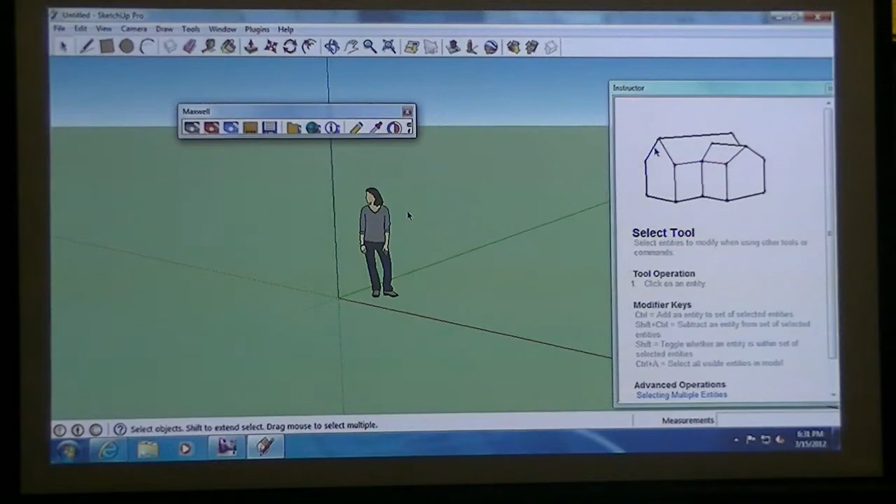We're not going to need SketchUp, right? No, this is the only time I'd ever open up SketchUp, just to show you where it can go.

So we need just the DWG? Yeah, you just need the DWG file, and you're going to need this JPEG file.

She's like the crazy aunt you don't want to invite to your wedding. Everyone wants to get their wedding. I'm a ball of fun.

Map 12B JPEG and Lower Manhattan DWG.

And then if you got your Revit open, go ahead and just start a new project. We're going to be starting part 2 of the semester, so no more bridges, and we'll get into some buildings.

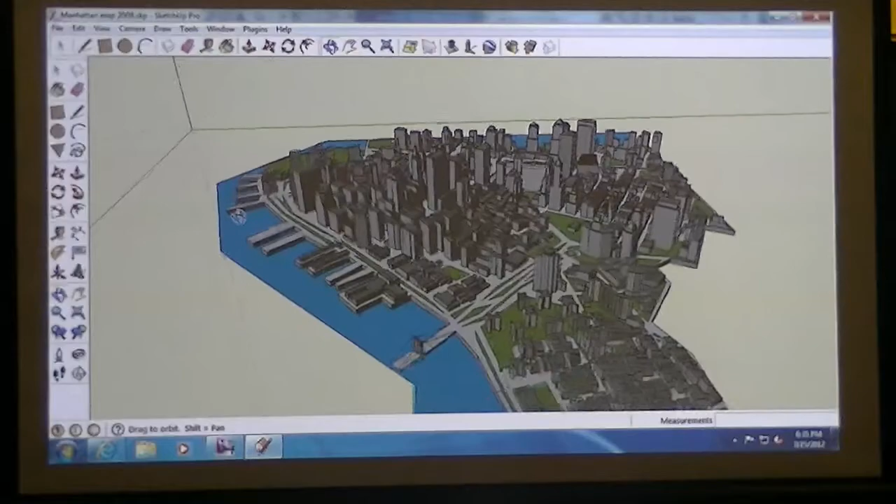Today we're going to start with this: I went to the Google Warehouse, and there's a Lower Manhattan SketchUp model that somebody provided there, actually from 2008. We're going to use this as our base model for the next part of the project. If you zoom around in the SketchUp model, you'll see a little building, maybe a church, with a sloped roof. I actually demolished that, and we're going to take over this site. I drew a couple of lines here, and this is going to be our site for the hotel we'll be designing.

So all you need to know is that in order to bring this into Revit, which we'll be doing here in a little while, I exported it. You can bring a SketchUp model directly into Revit, but DWGs always work better, whether it's a 3D model or even a 2D drawing. So I exported this SketchUp file as a 3D model and then as a DWG file.

The other thing to note is that if I click on some of the different materials shown on the SketchUp model and look at the RGB value of each one, the grass is 98, 140, 74, and the water is 0, 191, 255. Just keep those numbers in mind.

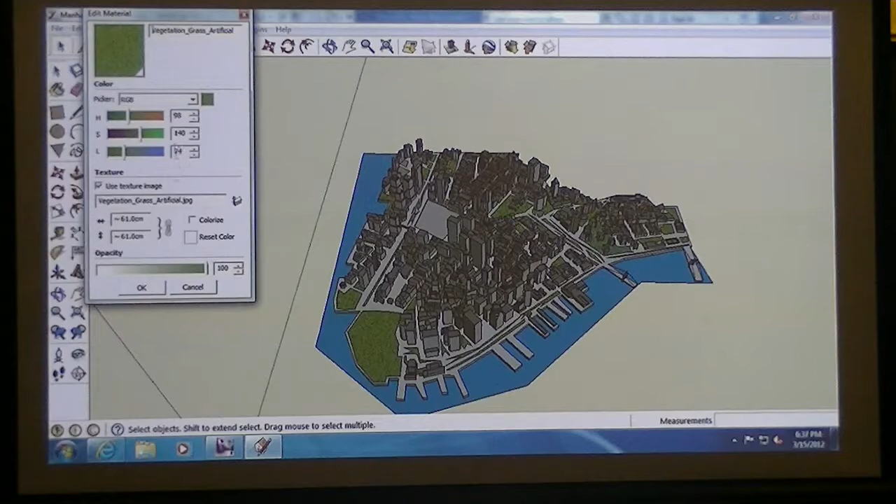When we bring a DWG file into Revit, essentially none of the materials come through. What actually happens is Revit will add materials into the project environment, but it names them based on the RGB values. So in your project folder or materials dialog box, you might see six different materials loaded in, all called something like 'render material, RGB' followed by that value. You'll see a whole series of those. So when I talk about that later in the class, that's where those numbers came from.

I'm going to close out SketchUp now, because that's about all you need out of this program.

If we have a blank project open, what we want to do first is establish bringing in this DWG file into the Revit environment, so that we can begin to do some massing, solar studies, and also some floor area studies.

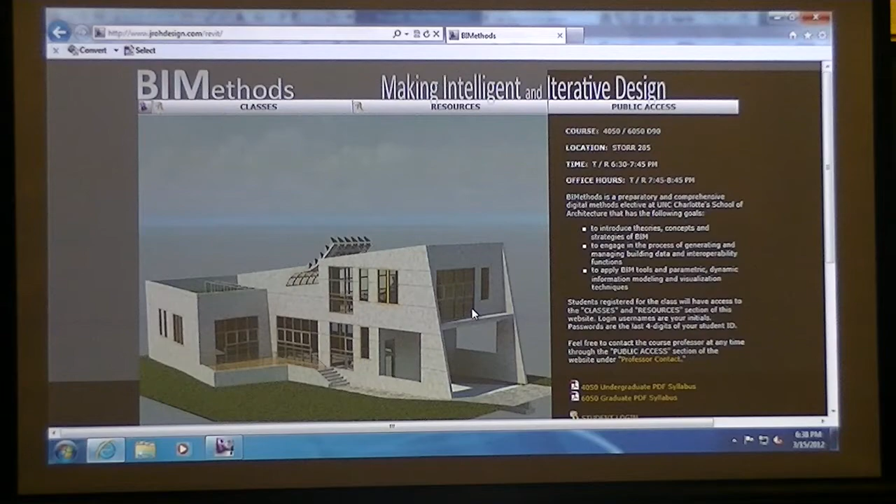One thing you'll probably want to do is refresh yourselves later with the syllabus, on the part that talks about part 2. There's a project narrative in there with our program for the actual hotel we're designing, including areas in square footage for the entire area and what all the different parts will be for the hotel. So download that PDF again and look at it when you get a chance.

The first thing we're going to do is go into a site plan. Under insert, let's go ahead and import a CAD file. Now, I'm not linking it, I'm going to be importing it. The reason I'm importing versus linking is that when I import a CAD file, it brings along some of the line styles and might bring along some of those render materials I was just talking about.

If I link it, most of the information stays in the background as part of the external reference. You would normally link if you plan on going back to that original DWG file and modeling more things with the site, and want it to eventually update in your Revit file—that's why you'd link, because you can always update by reloading it. If you import, it's a one-off: it comes in and you're placing it into the model, and if you ever want to update it, you have to delete it and import it again, going through all the setup steps.

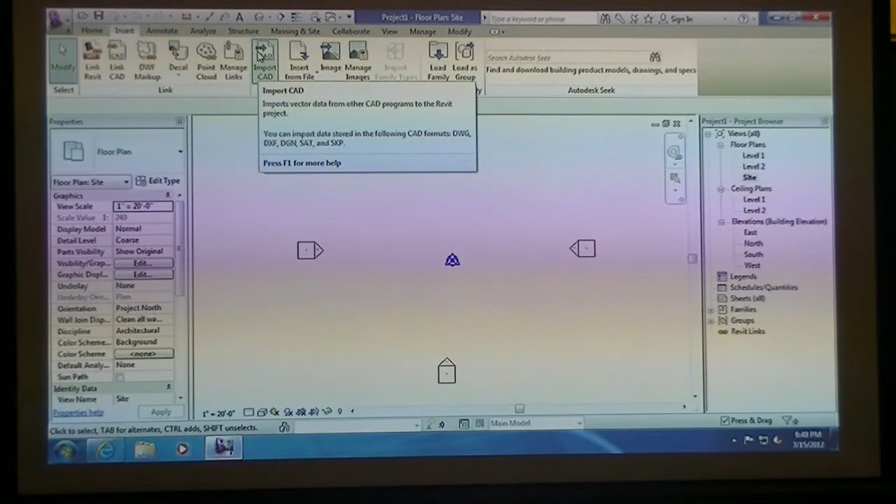If you link it, you have to keep that CAD file with you. Just like in AutoCAD, if you're familiar with XRefs, if you move your Revit file and take it with you on a USB stick, you don't always have to have that link with you, because Revit will say it can't find the link and it'll use the last known reference of it in the model. But if you ever want to reload it or do something else with it, you'd have to bring that file with you. You can't reload the link if you didn't have it.

So let's go ahead and hit import, and we're going to browse to wherever you downloaded your Lower Manhattan DWG file.

When we import anything that's a DWG, it's always recommended, and in general I always like to do auto, origin to origin, as a positioning. That's so if I ever export this and want to bring it into Rhino or another program, and I bring it in origin to origin, no matter where I'm working, I can always bring it back together. As soon as you do anything else other than origin to origin, you're manually placing it, and every time you want to bring it into another file, you're having to manually place exactly where the insertion point is, and you can start to really get confused after a while.

So origin to origin is always best. Colors, I always like to preserve whatever they were. And we'll place this at level 1, and that'll be fine, and everything else is good. We can go ahead and hit open.

Should only take a little bit here. You'll see the Lower Manhattan model is shown up in the top right. We're looking at it because we're in a plan view, so we see it from the top. And because we started a new project, remember, in our project browser, we don't have a 3D view, so we need to click on View, and then 3D View, Default 3D.

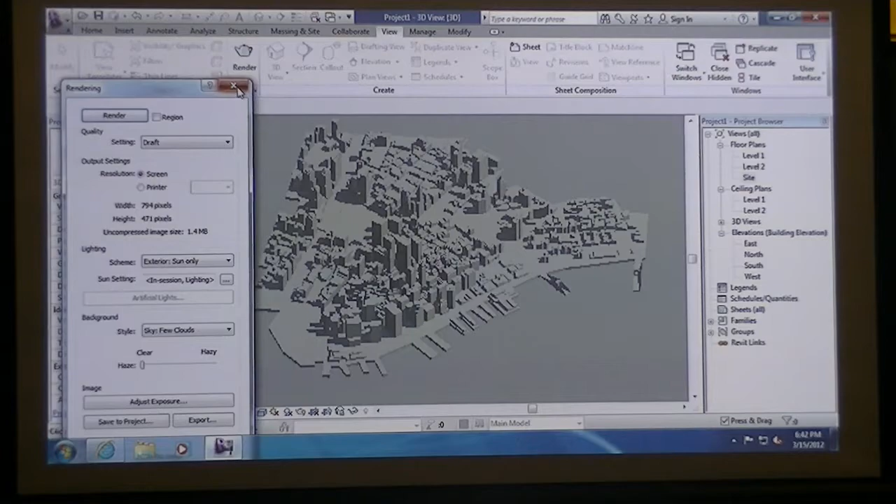And that might be okay, because we want to have a white model as part of our context so that we can do our own model with whatever materials we want. But you also might want at least some of the basics, like where the grass is located and where the roads are, so that you can delineate where the block is and so on. So in order to actually make those materials render eventually...

One thing you can do is go under Manage, and under Object Styles, then Imported Objects, you will see that under Lower Manhattan DWG there are 2 layers, and also a 0 layer, a site layer, and then there are these 2 render materials off to the right. We're not going to worry about those right now, but look at what is calling those render materials: Render Material, and then some random RGB value of blue, and the same thing with green.

If we look—I canceled out of that—and under Manage again, if you click on Materials, and since last class we went over the material dialog box, if you scroll down, notice under Render Material we have 1, 2, 3, 4, 5, 6, 7, 8, 9 different render materials. And here's one called Render Material 98-140-74. Remember I threw that number out there? That happened to be the render material of grass.

And you see that it turned green, and it's under shading. Well, that's why when we turned it on shaded view, we could actually see the grass, we could see the road and all of that. But look at the image up at the top—that's still a default gray image.

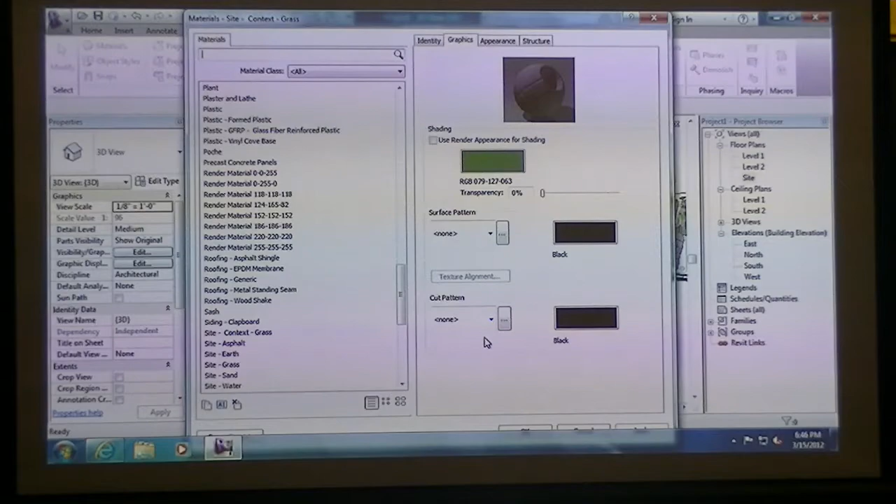But in order to change this, what we want to do now is click on Appearance. And if we scroll down under our Appearance Property Sets, there's a tab here called Site Work, and we could scroll down until we find a grass that we like. Maybe dark rye might be good. Other ones look a little fluorescent to me.

Let's see what that looks like. That's kind of bright. I'm going with dark rye here. Okay.

So by doing that, now when I go ahead and click on my view and render, do a quick draft rendering, I should get this kind of grass texture. And it looks a little out of scale right now, and I'm going to tell you why in a little bit, but we'll go ahead and keep it that way. We know that that works.

And another one that we might want to do is the buildings. We want to make those white. We'll keep the road gray however it is right now. So again, I'll go under Manage, let's click on Materials. I guess I should have kept my SketchUp model open.

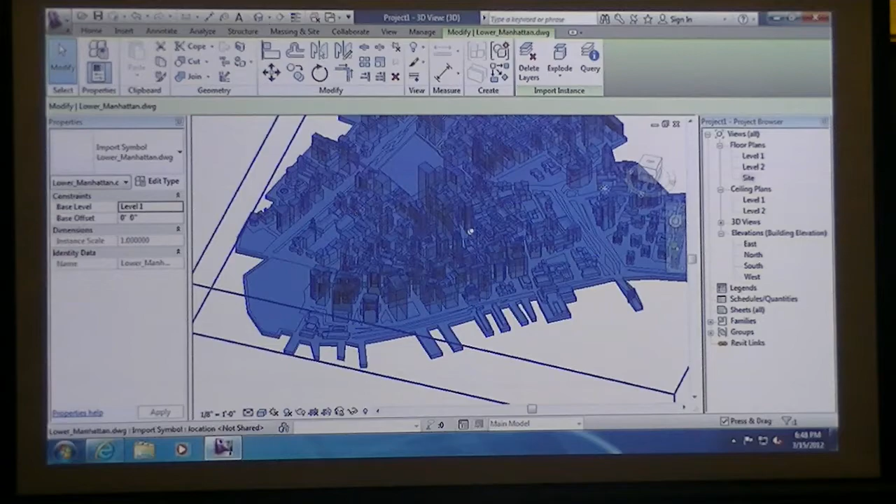Oh, I guess we can, let's do one other thing here. Where's query? If you click on this model and then click under a query, the top right. Let's see if this works on. You should be able to click on, looks like I can click on these different parts.

So I'm hovering over the buildings, and if I left click, it tells me nothing. It tells me it's a curve, it's not a block, and it's on layer 0, so that didn't really help me. I was hoping it'd give me some information about the color.

Alright, so let's just guess a little bit real quick. So it's one of these render materials, maybe this darker one, the 118. If I change it to red, so it wasn't that one.

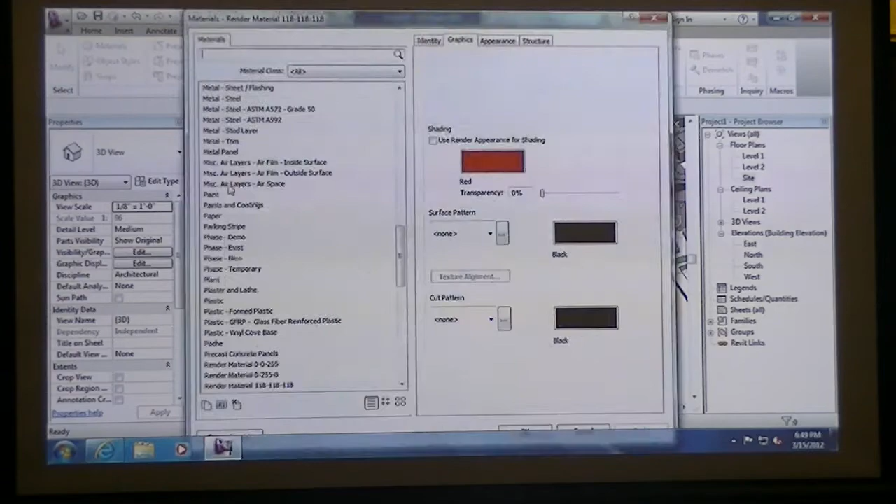Let's see if you guys can find which one it is. There you go. It is render material 152. That's the color of the buildings. So I'm going to rename that and also call this site context.

Does everyone have the same numbers, by the way? RGB values? Okay, because I have different ones on another computer. I don't know why. Site context and then buildings.

I'll change this back to the 152 that it used to be, now that I found it. And then under appearance, let's just go ahead and make that a default. I guess we could use a ceramic or a generic, and then give it, let's do generic and then make it 255, make it all white.

You guys see how I did that? Kind of a quick recap of what I did last class. Anyone need me to repeat that? Okay, so did everyone at least get to the material dialog box?

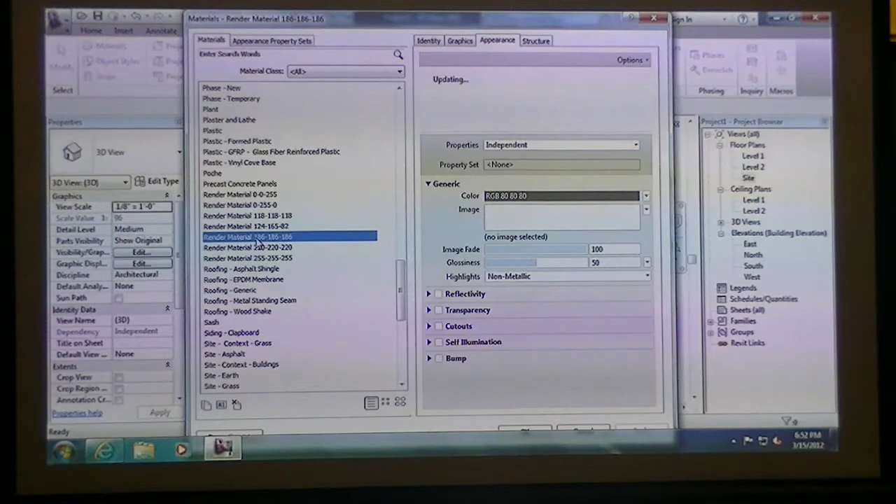Did I do the wrong one? Yeah, I was having a problem getting my buildings to turn red, and after changing it to white, mine didn't update either. Part of the site turned white though when I rendered it. All right, let's see if it was this one. Maybe I was on the wrong one.

So I did the wrong material apparently. It doesn't quite update as nicely as you would like. So I am just going to... site context buildings, I'm just going to delete that.

Would it delete whatever that was there? Probably. We'll figure it out. Let me change my render material to 118. That's what it was, site context buildings. Default.

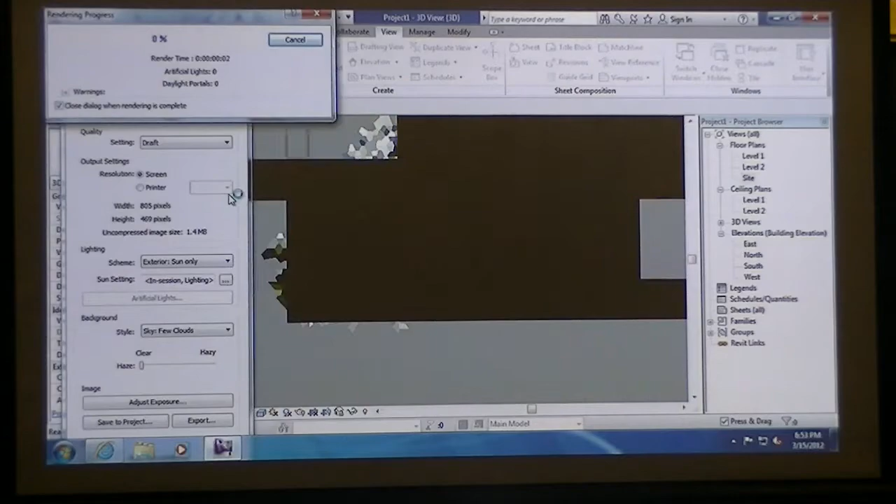Alright, so that worked. There's the 118, 118, 118. And whatever the roads were, that still stayed the default gray color, so that's fine. Alright, that's all we need to do on that part. Let's go ahead and hit save.

As we'll start calling this hotel something. You guys can't get your colors to change. It's not too drastically important at the moment. We can always go back and update those later.

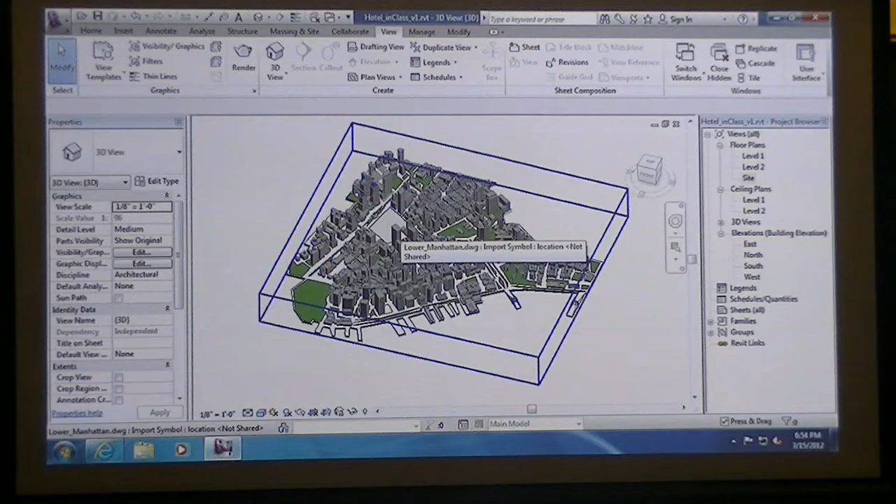So the next part is, if we are looking at this, go ahead and click on an elevation view. Let's say north, for instance. Remember our levels, our floor levels, our datums. Notice that we place this on level 1.

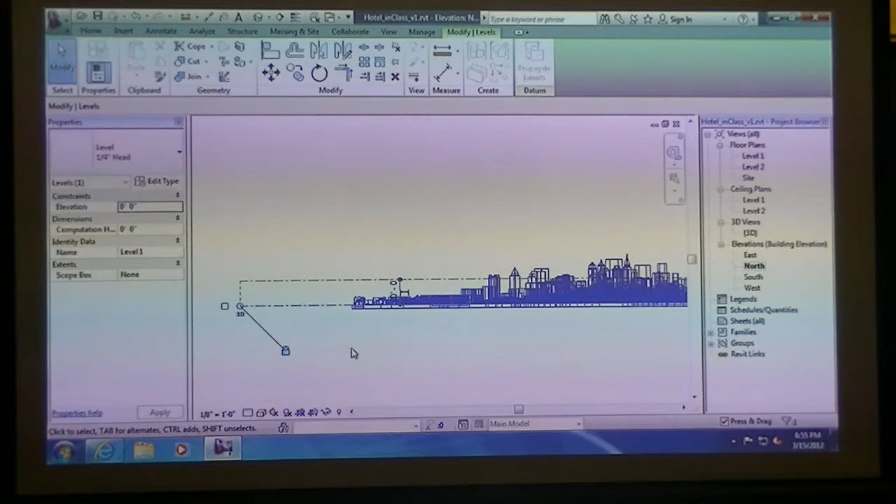And I can drag on these datums. I'm going to drag that 3D point all the way through this. But kind of look at the scale of this. Whoever modeled this in SketchUp, not sure what scale they're using, but there's no way that these buildings are 10 feet tall. But that's exactly the scale that this model came in at.

So because I want to use this, this is kind of similar to what you might do with scaling DWG plan files or even image files. We're going to get this scaled up correctly based on a set of information that we have. And that information is from the New York City zoning website.

I downloaded a couple different maps, and that's what you downloaded, that DWG file, or JPEG file, that was called map 12B. And when I look at map 12B, I can see that this is pretty much the lower Manhattan part of the zoning. And you also see kind of where our site is located, which is about right here, if I can zoom in.

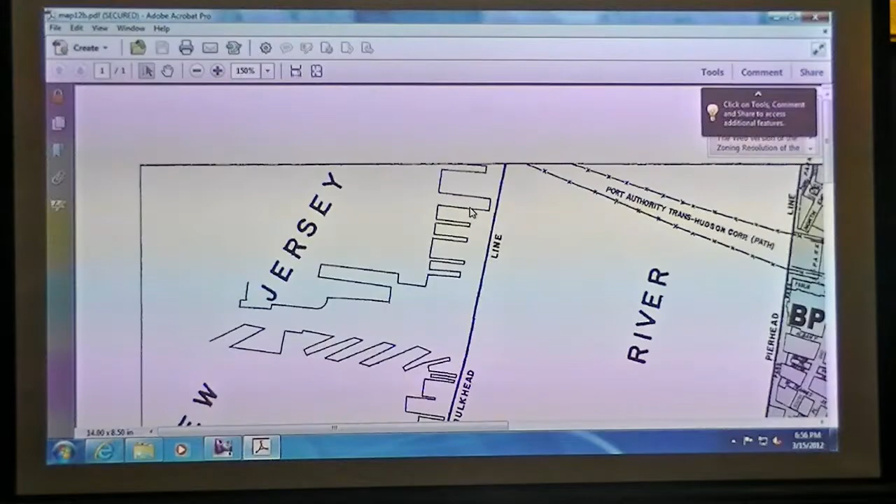Well, these maps aren't 100% as accurate, or the model's not as accurate either, but we're somewhere in this location right here. So the zoning for this particular space is in a C6-9 zoning. We'll get into that next class, but just remember that.

Also, when we look at this map, one thing that we can notice is that down in the lower left-hand corner, there's a scale. So by looking at this map, we can have some reference to exactly how many feet a particular inch is. It looks like it's 600 feet to an inch.

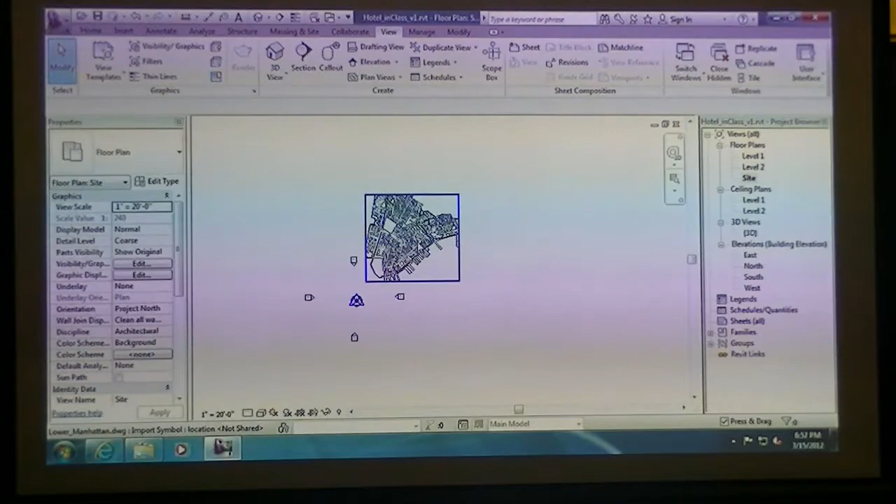In Revit, in order for me to scale this correctly, or as correctly as we can get it for the purpose of what we're going to be using it for, let's go ahead and insert an image file. Inserting an image file is like inserting a background that we can use as a reference. And the image files that we can import are shown below.

It says bitmap, JPEG, PNG, or TIFF file. Now originally I got this map file as a PDF from the website. So in order for it to be able to come into Revit, all I did was go into File, Save As an image file, and then picked JPEG, TIFF, or PNG off of this PDF, and then you get the same thing as an image file.

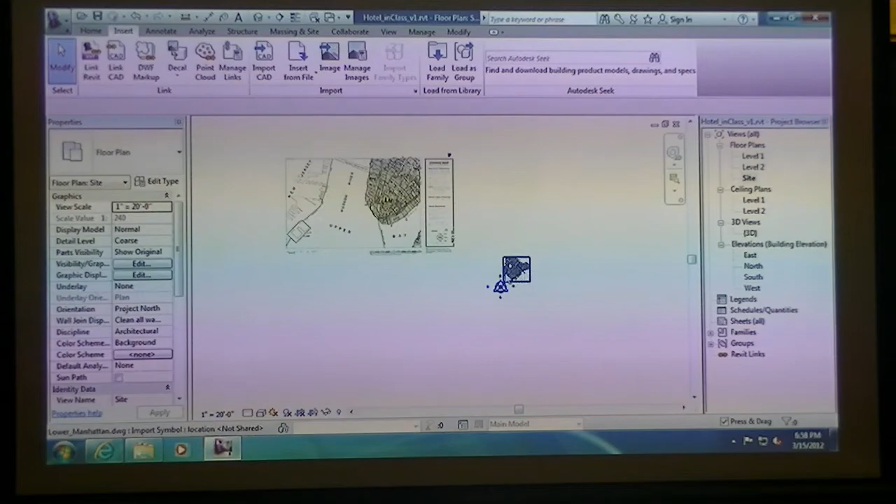So now we can go ahead and select our map 12B, and then we'll also just kind of drop it somewhere on the screen, it doesn't really matter where at the moment. So you should have an image that's placed in here, and it's definitely a lot bigger than that actual model that we just downloaded from the Google warehouse.

If I zoom in on the scale on that map, let's go ahead and click on Annotate, Detail Line, and then under the line styles, also go ahead and choose lines instead. Right now the default is thin lines, I'm going to choose lines. The reason I'm choosing lines is this line type comes up as green on the screen instead of being a black line.

Annotate, Detail Line. When you select that, you should have a drop down under line style on the far right, and then you can pick lines.

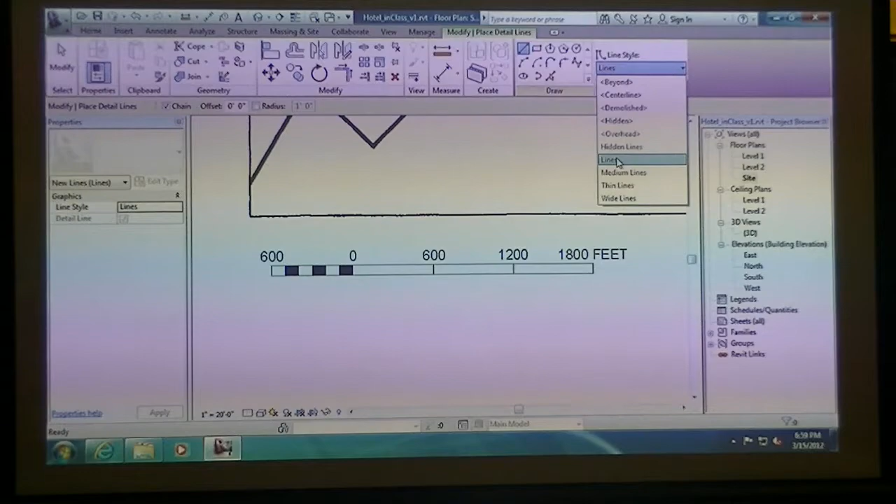Now I'm going to get as close as possible as I can to the 0, hover my cursor over this, and I'm going to start drawing to the right, and I'm going to type in 600 feet.

So you can see that even this image, when it came in, obviously isn't drawn to scale, it wasn't a full-scale drawing of lower Manhattan. And so this green line right now is representing 600 feet.

If I zoom back in on the scale, I can draw another line. I'll kind of draw it below this other green line that I just did. And I will draw a line and get it as close as possible to this other 600 feet.

You may have to zoom in. You don't have to be exact, but just close enough. So my line is like 41 foot 6 inches.

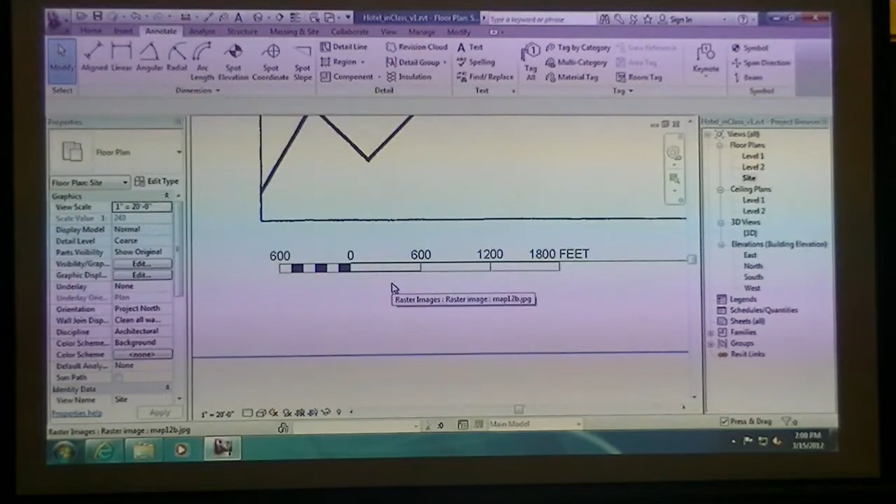Everyone got those two lines? So basically what it's saying is this image right now, 41 foot 6 inches of it is equal to this 600 feet.

If I click on this image, actually zoom in, and now that you have those two lines, I'm going to take this shorter line and move it, snapping to the end point, and move it up to overlap exactly on top of the larger line that we drew. So you should have two overlapping lines that you can tab over and kind of cycle through, so that they're on top of each other.

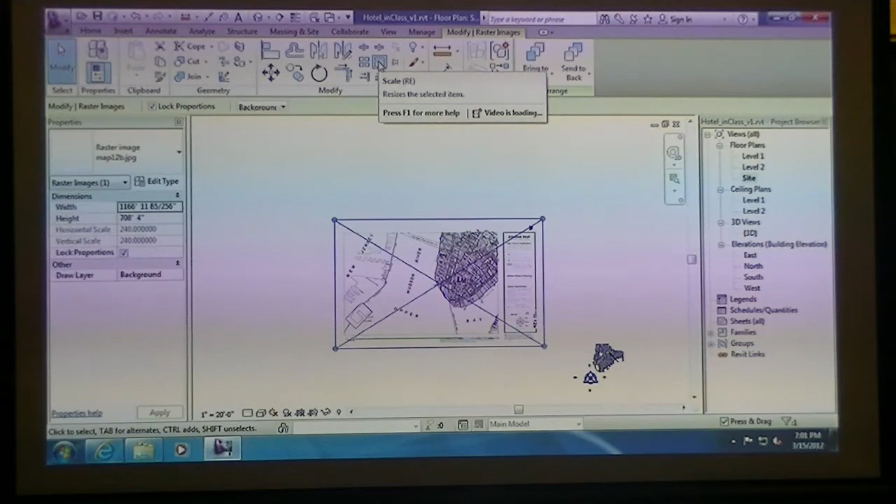Next, I'm going to select the image, and so now in order to scale this image to be true scale, actual scale, once we select the image, our modify tools pop up, and under modify, there's a tool called scale, right there.

Let's go ahead and click on scale, and we'll keep it graphical. We could do a numeric scale, which would mean I'd have to actually pull out a calculator and type in 600 feet divided by 41.5 feet, and I'd get some kind of scale factor that I could type in numerically. Or I could just keep it graphical.

And then my first point that it's telling me to click on, it says click to enter origin. I'm going to click this endpoint.

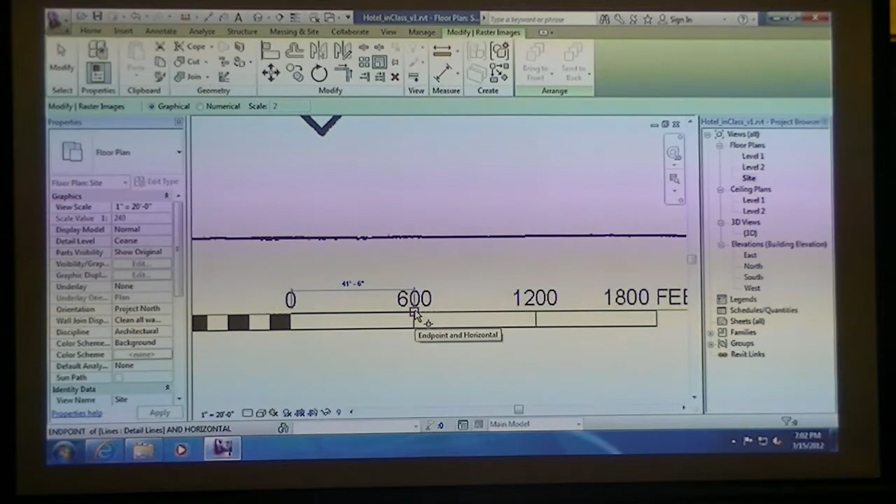Then it wants me to enter a drag point. That will be that short end of the line that's at 41 foot 6 inches. So I'm going to keep moving my cursor until the endpoint shows. I'll click there.

And then it wants me to pick another line as the end reference, and that will be the end of that line. So now what I did is I basically have something that I could actually draw a line on top of this image, and I could physically know that I am drawing something to scale that's in a real scale.

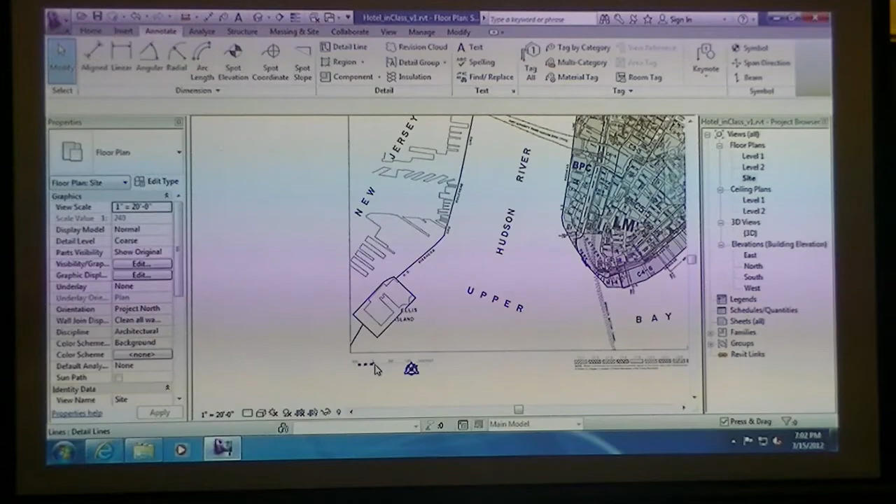When you're done, you can just delete those two lines. One will be really, really small now, because it was at 41 foot 6 inches. Go ahead and just delete those.

So now, if you look at what Manhattan looks like in the image, and then I try to zoom in on my model, look how small the actual SketchUp model was in comparison. So we definitely know there was some kind of scale issue going on when that was actually modeled, or maybe when we brought it in, we did something to scale it, but that's a possibility as well from moving from one software application to another.

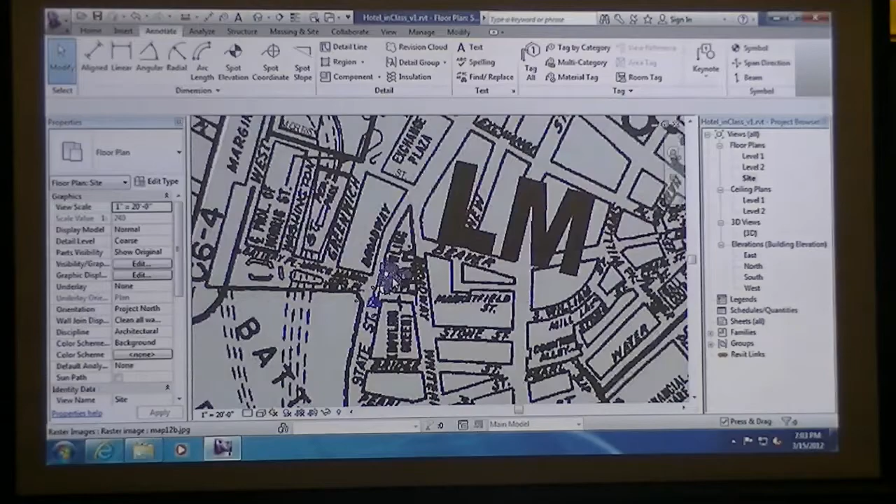Everyone get your image scaled up? So...

The next thing I want to do is I'm going to zoom in on this model. And it might be kind of hard to see. Maybe we can turn on a shaded view.

And when you zoom in on that lower right-hand corner of Manhattan, you'll see all the buildings are kind of gray or whatever color we ended up eventually coloring them. But you'll see these kind of black lines that outline a space.

This is where I demolished that little, whatever that building was, and I'm taking over the rest of this site. And so I drew some lines in the SketchUp model that you guys imported. I exported to DWG and then imported it into here, but before I did that, I drew in SketchUp just a couple lines that will reference our boundary of our site.

Next thing I'm going to do is zoom out. And this part right here where it says Financial Square, I believe that to be this location on our site. For the sake of what we're doing, it looks correct to me. There's 1, 2, 3 buildings or 3 zoning spots, and then there's all these little buildings off to the right.

If I zoom out, I've got kind of the same situation. Maybe the blobs aren't all exactly the same, but it does look like the length of this street here should be something that we can measure.

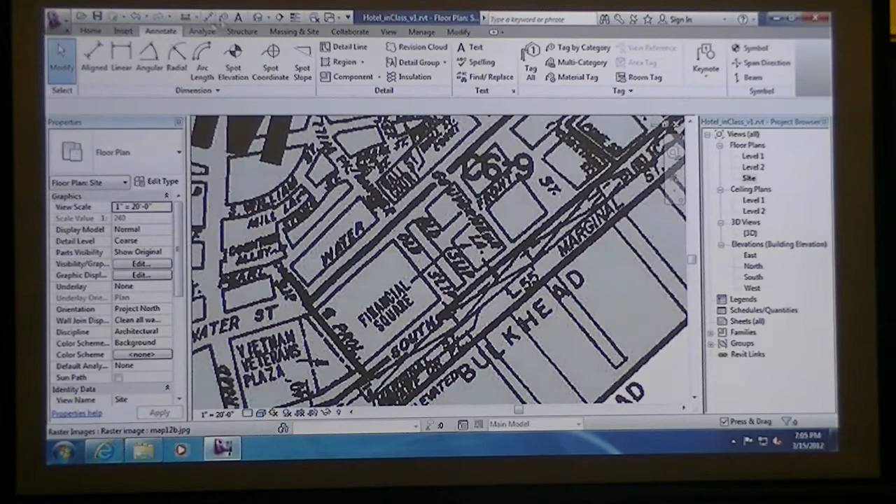So now, in order to scale our DWG file, I'm going to click on the detail lines again under Annotate, and I'm going to trace as best as I can the start and end point. Again, we're not going to be exact, but I've got a dimension of 312 feet. So you could also just type in 312 feet.

So I know that that length, according to all the information we have at the moment, is supposed to be 312 feet. And if I go find the same location on my model, and if I were to use the measurement tool, up here in the quick access toolbar, which is at the top, it's this toolbar that never changes, there's the ruler command, so you can measure, and I can just click on 2 points.

And I may have to tab to get that other endpoint because of the angle we're at. So we can go ahead and tab on that, and you can see that our true length there is like 7 foot 3 1/8 inches. So obviously we're way off on this scale.

So what I want to do is draw another line, but this time I'm going to pick lines. Let's see if I can do this. Okay, so sometimes when you have a CAD background, actually all the times when you have a CAD background, and you're on Annotate or in any kind of mode where you have these draw commands, you have this one command here called pick lines.

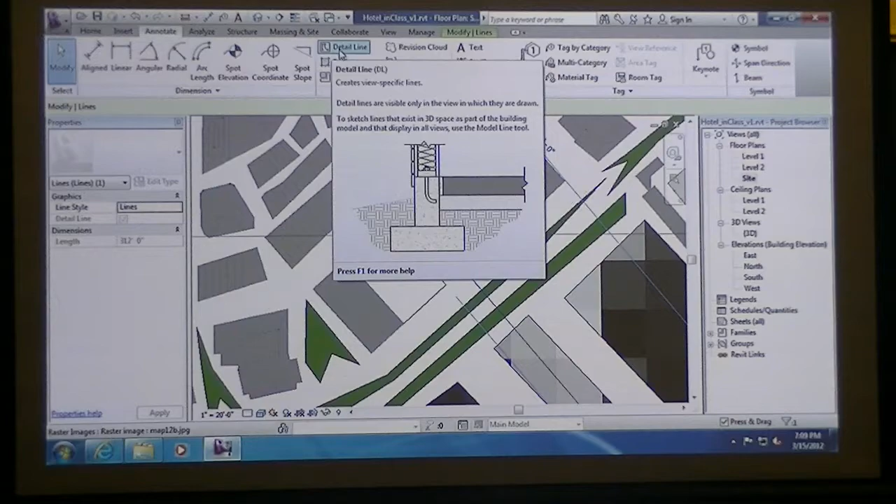You can also draw that line by, if you start drawing it, you'll notice that you do get dimensions that start showing up. So you could just kind of drag this out until you get to 312. So that is a method. So you have to keep going.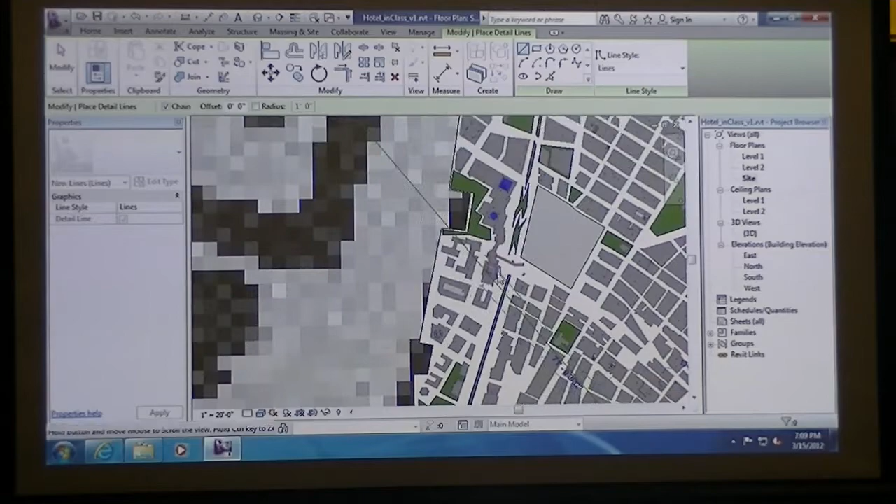So take this line that's 312 feet, select it, and let's go ahead and move the endpoint. I'm going to temporarily hide this image file in the background so you guys can see what I'm doing.

Take this line that's 312 feet, click on move. I'm going to select the endpoint down here in the lower right, and I want to match it up to the endpoint of our site. Again, kind of the same theory that we just did with the image. We're overlapping our two lines.

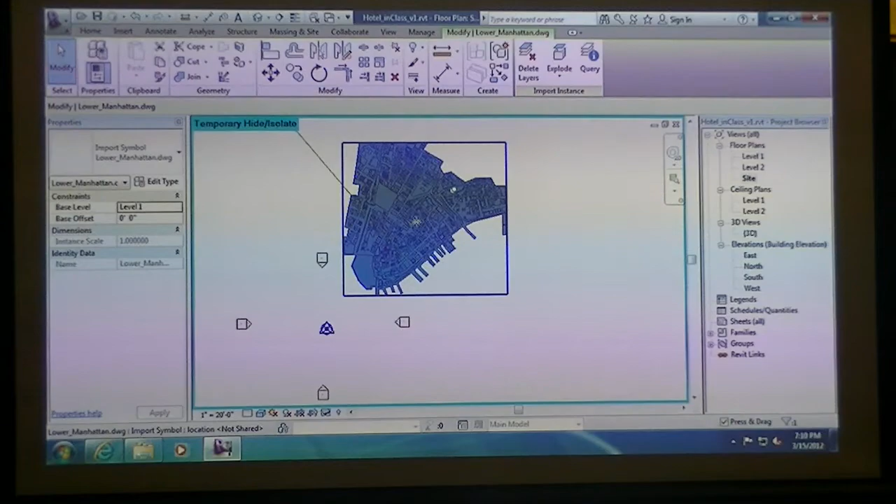Then we can do the exact same thing. We can select this AutoCAD file, and you'll notice there is a pin, this little push pin icon that shows up. That prevents us from changing the element position. So we need to click that to unpin it. You can also unpin it by the icons up here, and you can also repin it by the same icon. You want to unpin this, and then we're going to do our same steps.

We're going to hit Scale, Graphical, and again we'll select the endpoint and this other shorter endpoint. Then let's go ahead and scale and select our endpoint of our 312 feet.

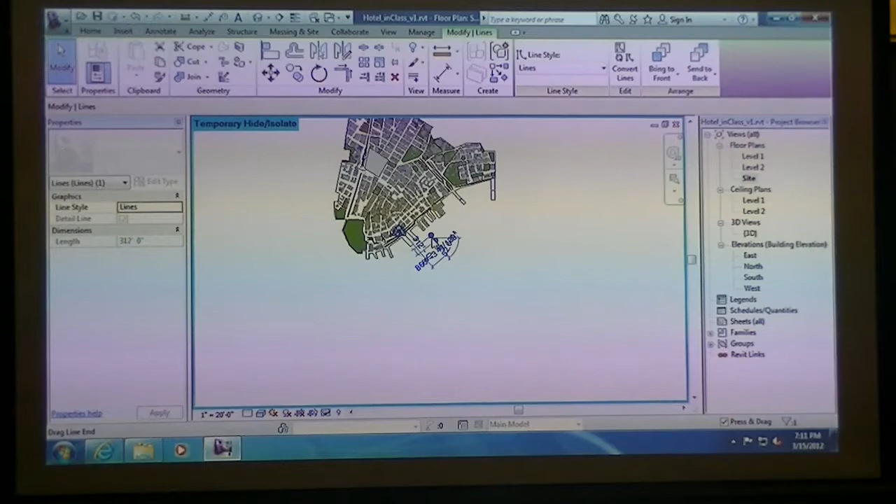When we're done, we can delete those annotation lines. You can kind of start to see that the annotation lines, even though they're for drafting and doing things later when we get into detailing, I use them a lot just for construction lines, helping us maneuver around in Revit, and just use them as basic temporary lines that we can eventually delete.

Now when we look at a north elevation, you should see that that looks a lot more realistic, that our 10-foot floor line looks about correct. That's probably about a story, and all these other buildings are probably scaled correctly as well.

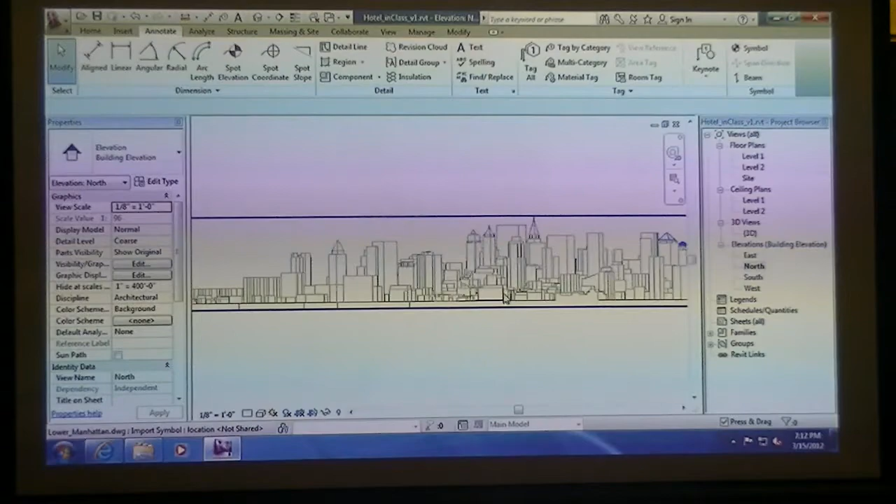Go ahead and look at our 3D view. And now this time when we hit the render button, view, render, I'll just do a quick draft render.

No, my grass didn't change. I was thinking my grass would have scaled correctly. So we'll have to worry about that later. I might actually just go into my grass material eventually and just turn it a default green color, so that when we actually render, we're rendering all of our materials associated with our building.

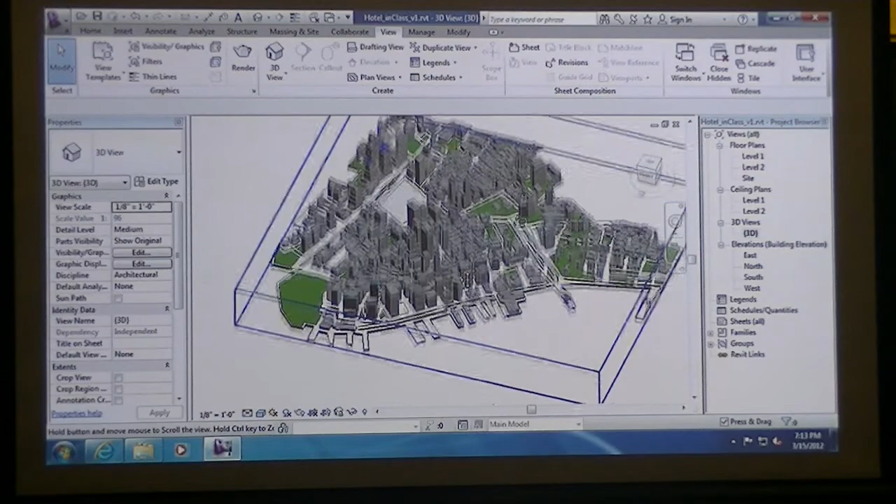Would it have scaled with it? Like if we would have applied it after the scale, would it? Maybe. Let me look at my site context grass appearance. Come on. Oh, it's going.

So, well, it does have a scale, sample size, so I probably can play with this scale eventually to scale it down. But the detail level we're going to be at when you're trying to render a skyscraper or whatever project, you're probably not going to really notice the little grains of grass. So it'll probably be better if we eventually just make that a solid color. We'll do that later on.

I'll probably just hit remove image here, and change my color. What was that again? 79. What did you have before? I'll just pick a green right here.

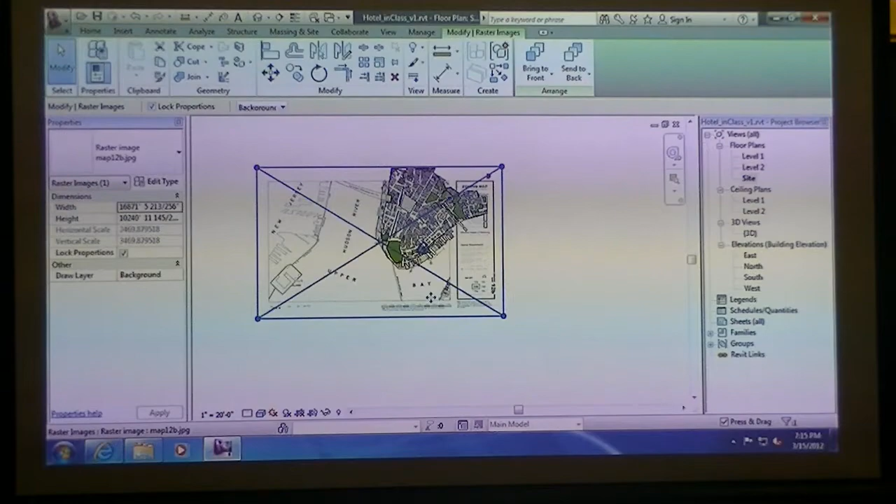So I'm going to go back into my site plan. Remember I temporarily hid that image, and I'm going to unhide it. Then if I maneuver this around, it actually looks like I got this pretty close. If I turn on my wireframe view, I can see through the model.

It's kind of confusing, but part of this zoning map where it says C4-6 is actually some of the piers out in the water. So anyway, you can see we're relatively scaled close. I'm not going to worry about being exact at the moment because this will give us a file we can now work with that has some realism to it.

Obviously, if we were working in an office, we'd probably hope to obtain a really nice survey of our plot of land from a civil engineer that would be to scale from AutoCAD, and we would be working off of that. So I'm going to delete that image because we really don't need that anymore.

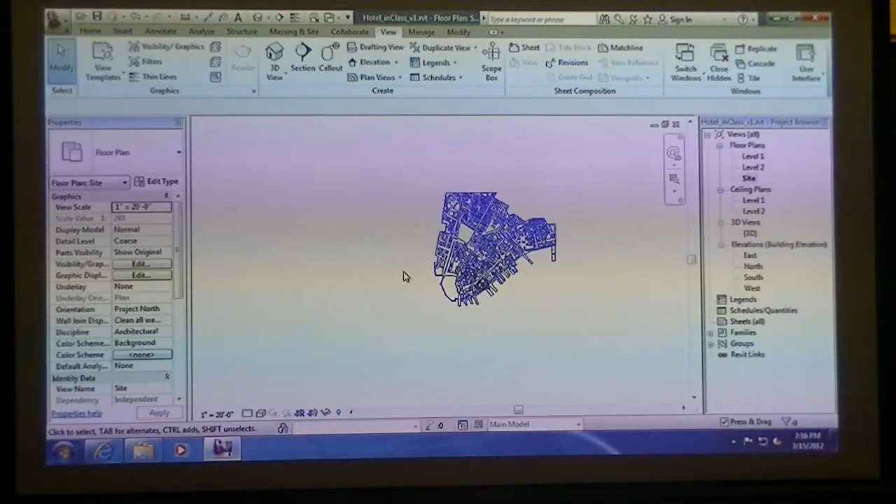The next item I'm going to do is take this 3D DWG file. Remember we're in our site plan, and this blue dot is our origin point. I'm going to make the origin of our site this lower, kind of the south quadrant, and move that and tab over until I snap to that point.

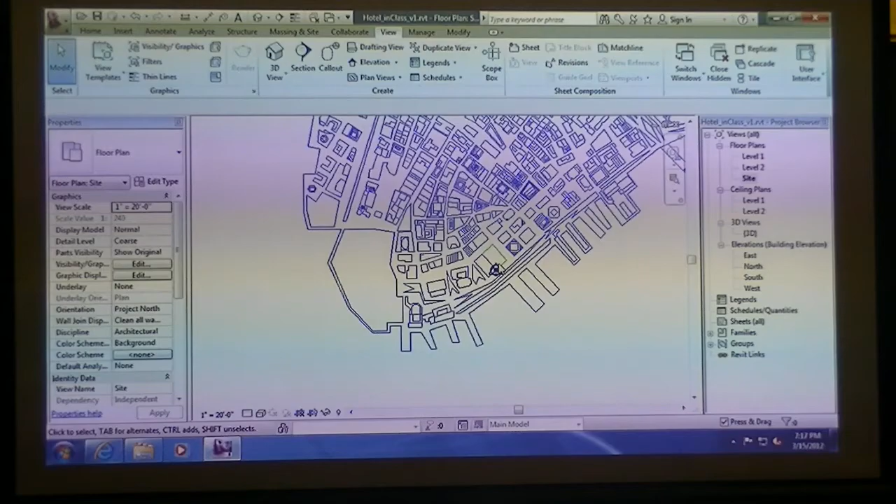One thing that was right about this model: the scale was not correct, but the orientation was. This was oriented correctly to north, and this is east, west, and south. So when we actually do our sun shading diagram and turn on our sun path, we should have our north, east, south, and west oriented correctly as well.

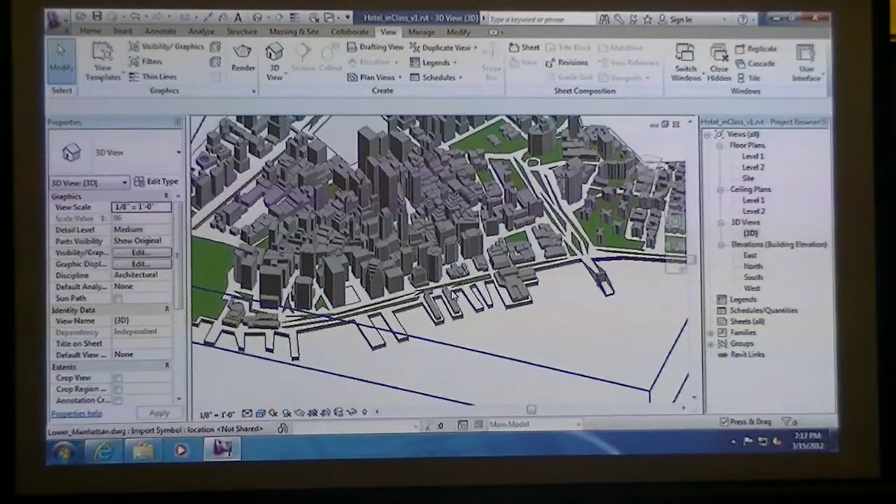All right, everyone got all this? You might want to hit save. Yeah, it keeps moving my project. Looks like on mine, they're both right on top of each other.

Move just the circle. Hit Control Z and undo that if you moved your blue dots around. The next thing would be to zoom out a little bit, make sure you're selecting just the 3D object. Then you should just have to move that. Make sure your DWG is unpinned.

Okay, I got rid of it. And then when you move, you're actually snapping to the 3D object first, and then moving it to the dot. That should keep the dot exactly where it was. You might have to tab over to select the point.

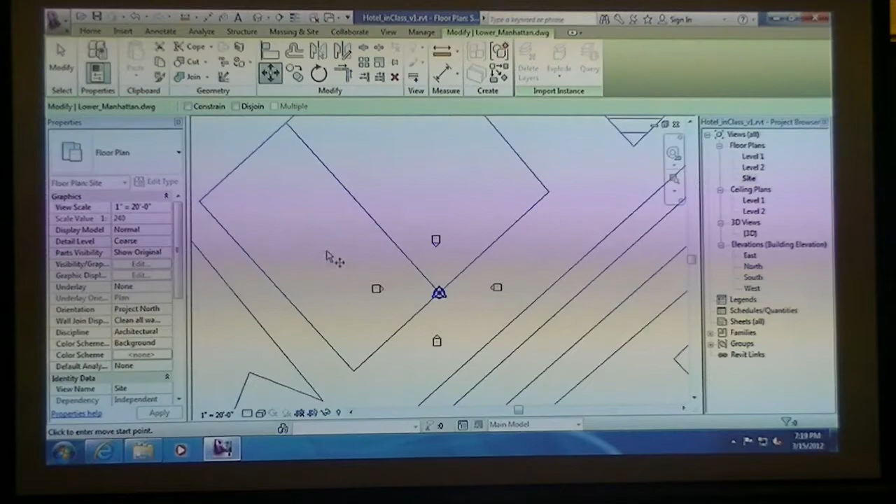Those things are supposed to be around. Oh no, are they? Yeah, here's those four things. When you click on that dot, you should have everything still set to 0, 0, 0. When you click on your dot, what happens? 0, 0, 0, okay. Somewhere along the way these four points got moved.

If you see these little points around the dot and you accidentally move those, don't worry, somehow they might have gotten dragged. Those are your elevation markers. If I double click on one of those triangles, it takes you into the north elevation, or the east, or south elevation, and we can move those around later. You don't want to delete them, because if you delete them, you delete your elevation views.

All right, everyone there?

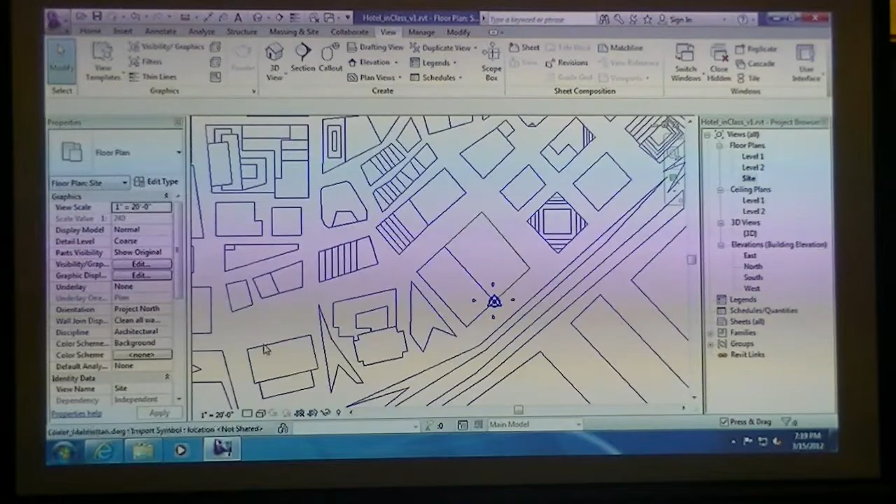Let's get into some massing. We're already familiar with the conceptual design environment and all the stuff you can do with it, like making a bridge, and you can probably even insert your bridge in here later on when you feel like it. But essentially, now that we're actually modeling buildings and we're in the schematic design phase, we've been handed a program, and that program starts to display what our overall square footage is of what we're designing towards.

We may want to start doing some massing studies to identify the shape of our building and how that's going to actually work. And because we're doing this in a BIM environment, we can go ahead and start to track the floor areas to make sure that whatever we're modeling isn't too small or too big, but we're trying to get something close to the actual square footage of the hotel or whatever the program is.

Now, the program that I gave you is all in net square footage. You all know there's a net square footage and a gross square footage in the real world. Net square footage, if you could measure inside a building from finished material to finished material, that's the area of a room that way. It doesn't include the thickness of a wall. You're just saying, I want this room to be 100 square feet, I want this other one to be 200 square feet, but we also have to build walls. So eventually, in the areas you're handed from a client, you're going to have to calculate what the gross square footage would have to be when you're in the schematic design phase.

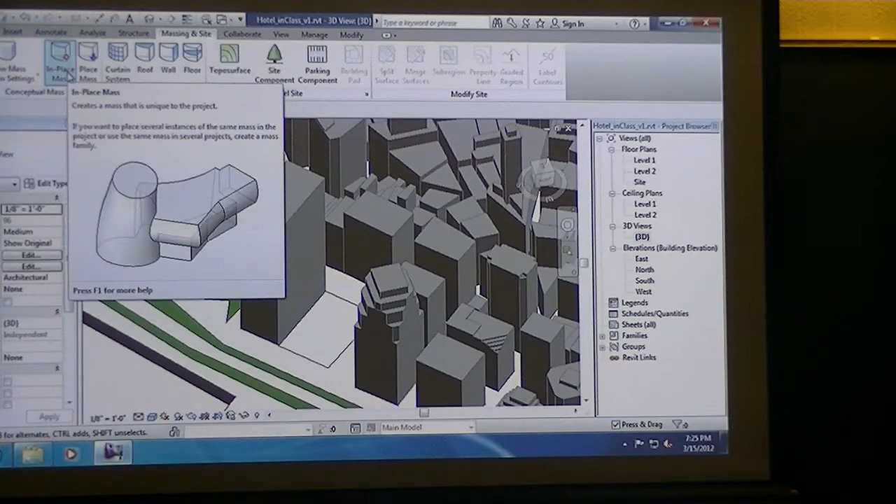If I click under Massing and Site, you'll see there's a conceptual mass tool palette. This is very similar to being in the family environment and being in that conceptual mass environment that we've been working in pretty much most of the semester.

But when we click on this, again, it's going to give us this little warning that says, hey, by the way, I got to turn on the mass mode, because Revit always likes to turn that off for some reason. And then it's going to ask you to name your mass. This is similar to naming kind of like your file, your family file, that you'd be working on if it was external to this project environment.

I'm just going to call this hotel, maybe I'll call it V1 for version 1, and hit OK. As soon as I do that, everything kind of grayed out, and you'll notice at the very top I have a finished mass and a cancel mass icons. You also notice at the top, look at what happened to your tool ribbon.

It pretty much completely changed from the project environment and turned into something you're a little more familiar with when you're in the family environment. So essentially we're actually in the family environment, but we kind of have the project environment overlaid or underlaid on top of this at the moment.

So this is a way to actually model right here with the conceptual mass right inside of this model. Now we can start to do a lot of the same things that we used to do.

You can go ahead and click on a rectangle, and I'll say draw on work plane. I'm going to pick level 1. And right now I'm just going to draw some form right now, kind of in the middle here. Again, make sure it's closed. I was going to draw a rectangle, but I remembered we're kind of skewed at the moment.

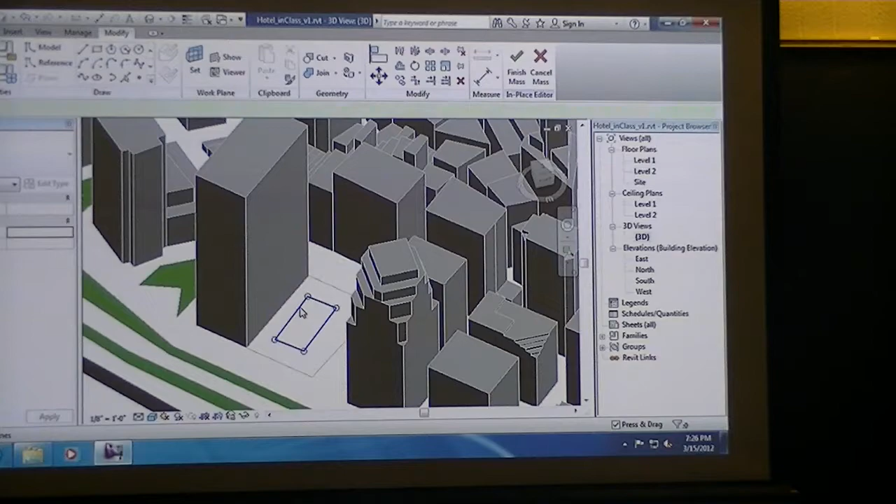But again, you can click on that and then say create form. It creates your solid box. And then you get those little drag handles, so I can drag this face up. Right now, I'm not really too concerned about what the actual size of this thing is. I'm just kind of playing around at the moment. So I kind of drag this rectangle up.

Once we do that, we can click on individual edges. So I could tab over and click on this top edge, and move just that edge. You can see how I can start to manipulate this one edge a little bit. I can also tab over.

If I select this whole thing, I can click on X-ray up at the top right. X-ray will turn on all the kind of points that establish what makes up this mass we're working with. So I can actually pick a corner point and further start to manipulate this.

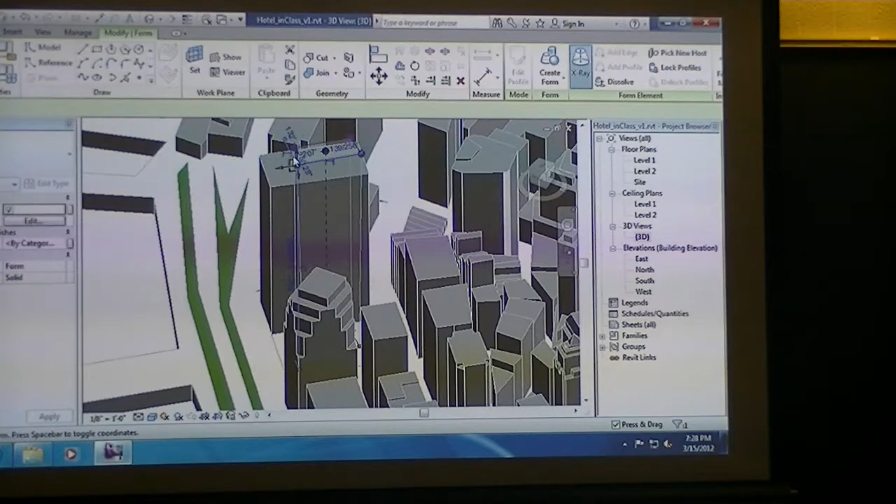This is what's called, or referred to in Revit as, intuitive massing. I put intuitive in quotes because it's not like SketchUp, but it's a lot more intuitive than trying to plan out all of your parametric points like we have been doing. We're just kind of playing around with this piece of mass.

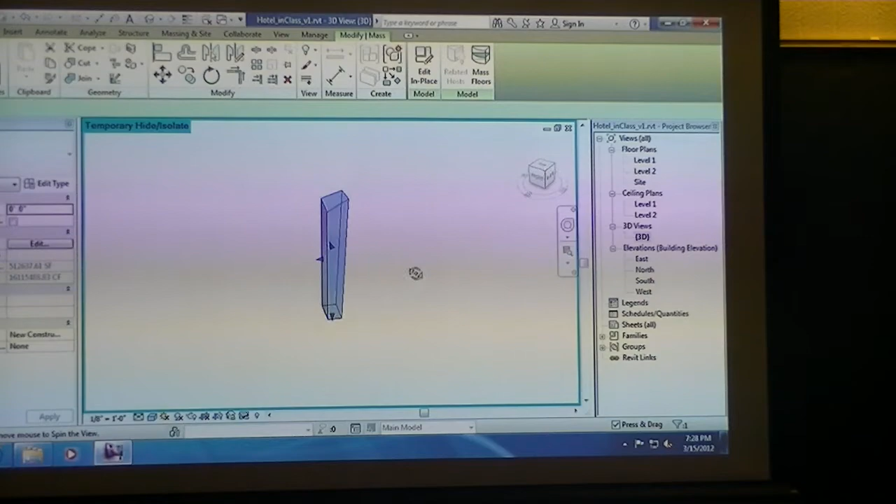If you decide that you want to not really worry about the rest of the site at the moment, I'm going to finish this mass and then click on the site and temporarily hide it. This way I can kind of look at the mass one more time.

Once we do that, once I finish the mass, I'm basically exiting out of the family mode and I'm now back in the project environment. If I want to get back into that mode, I have to click on the mass and then click on this box up here that says Edit in Place. Once I click on Edit in Place, I go back to my family mode. It's kind of like switching back into the conceptual design environment.

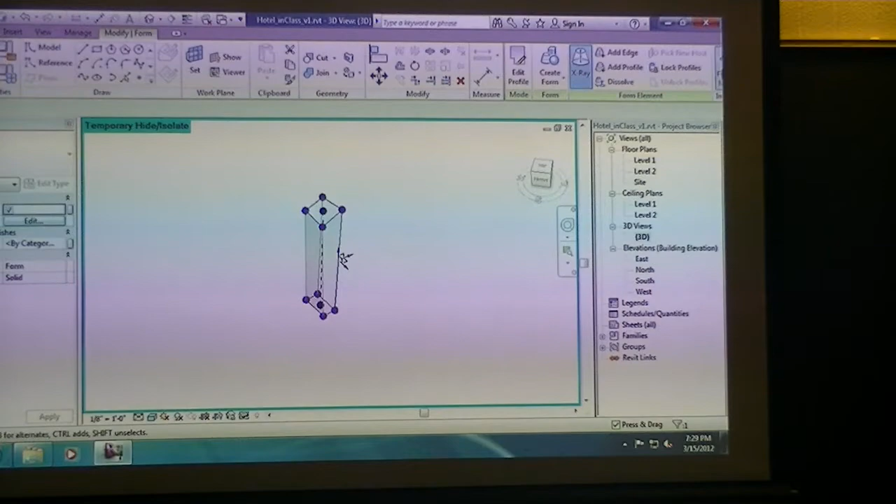So somehow, anyway, while you're modeling, at any moment if you hit Finish Mass — okay, the little checkbox — notice that it went back into the project environment, and I'm now actually in the mode where I could select my imported geometry and click on the sunglasses and hit Hide Element.

If I want to go back in, because I wasn't done modeling this mass, I go ahead and click on this, click on Edit in Place, and that takes me back into that mode.

Let me show you a couple more tricks with modeling in kind of block form. Let's say we've extruded this mass up, but we want to go ahead and work with some more of its shape.

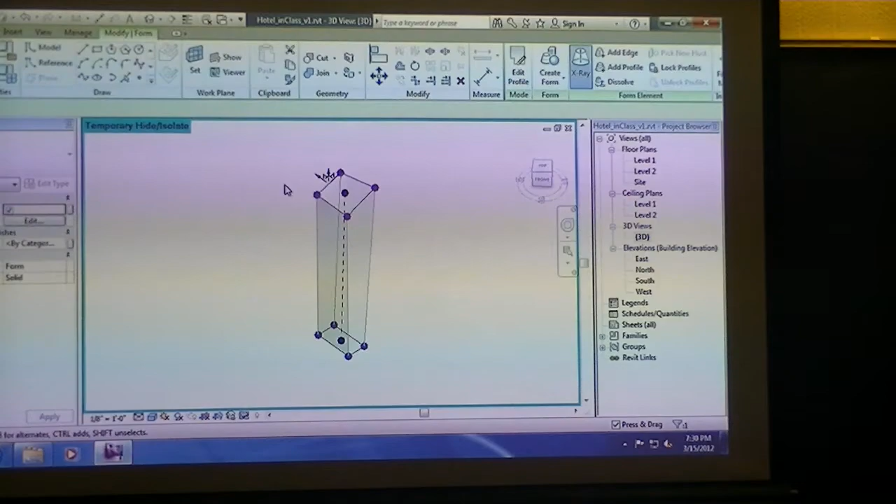If your mass kind of looks like this, go ahead and tab over until you select all of the mass. You should have a button up here called X-ray. Click on X-ray mode, and as soon as you do that, it gives you some additional commands over to the right that talk about adding edges, adding profiles, and dissolving.

So if I click on Add Profile, I can hover over my mass and see how I can kind of extrapolate or extract a section. I can go ahead and add a profile. This is kind of like what we did on the bridge — remember, we added a profile to the conceptual mass of the bridge to make it change its width.

As soon as we do that, we get an additional set of points and edges that we can further manipulate. The more of these little section cuts you have, the more you can begin to move it around. Revit assumes you wanted everything to loft together as one mass, so it's kind of making this curved shape as I started maneuvering those points around.

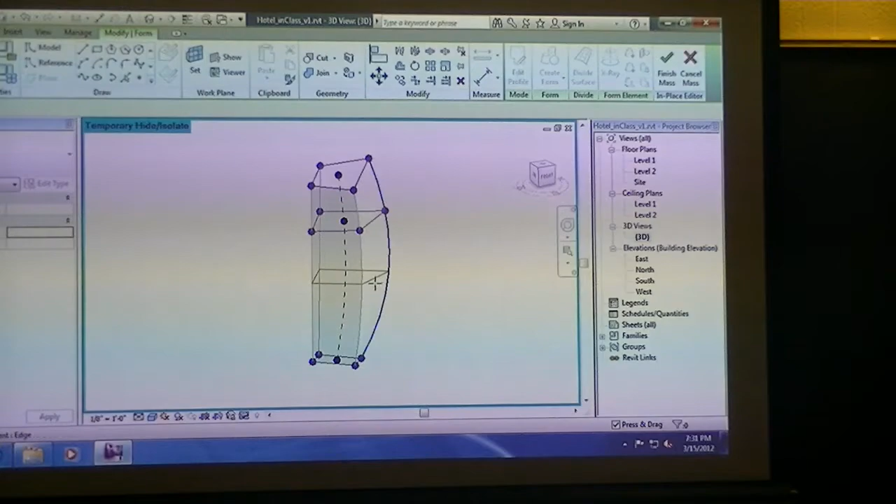If you decide that's not what you wanted, let me go ahead and add another profile down at the bottom here, somewhere in the bottom. I can at any time select this mass, and there's another command here called Dissolve. If I dissolve this, it keeps all of my profiles and some reference points, but it dissolves the mass that we created.

What we could do is then come in and select each of our profiles and hit Create Form, and continue this one by one, and we get something that's more straight, angled, lofting each of these forms back and forth. So then we actually have a number of different masses kind of put on top of one another.

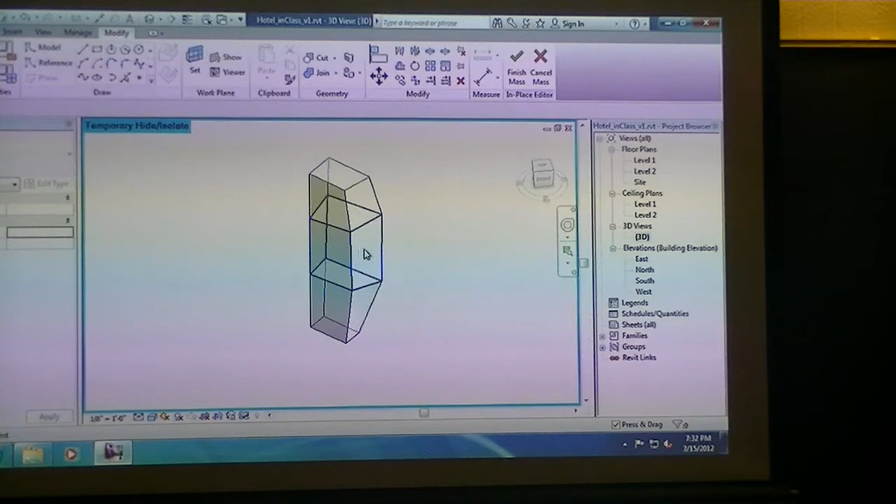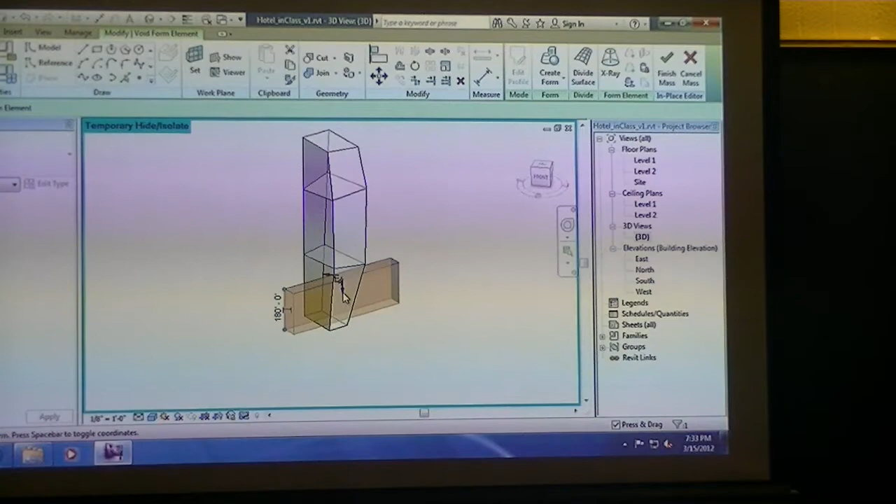We can also draw voids. I'm going to click on a rectangle. Remember, one of our create forms was a solid form versus a void form. I'm going to draw a rectangle. Actually, since we're skewed again, I'm going to just use the line command, and we're going to draw on a work plane, on level 1.

I'm just going to draw some shape here that intersects through my form, and then create a form by doing a void form, which extrudes this box up. When I exit out, I now have cut a void through my mass. So you can start thinking about starting off with this big piece of clay, and we can start to do what's called stereotomic modeling, where you're carving out pieces of your model, or you can maneuver and expand your model by moving its points around in all of its shapes.

I'm just going to leave it like this for now. It doesn't matter what shape you have. When I'm done, I'm going to click on Finish Mass. I'm not worried about that warning. And I'm going to reset my form here.

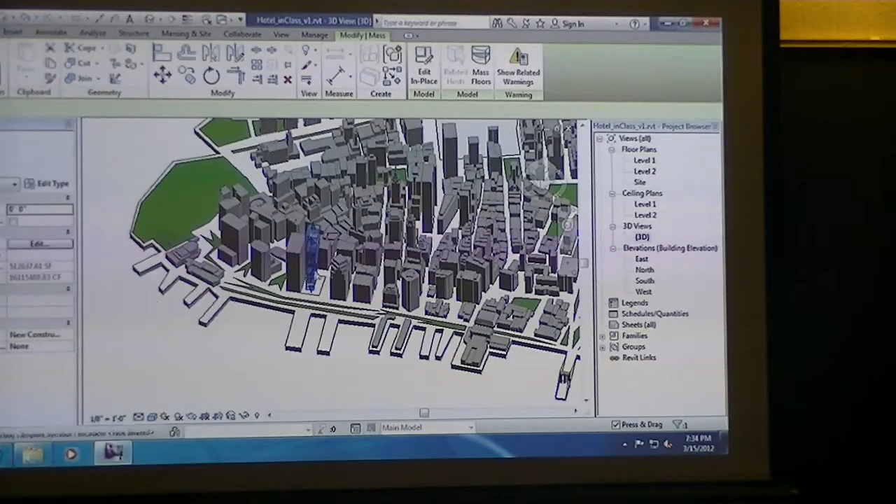I could come over here to View, and let's click on Render. Let me do a quick draft rendering. And I should see this little gray box that's down in there now—that was my form that I just created. We can click on this mass, and when we're in Edit in Place, you can tab over and assign materials to the mass. So all of these individual masses, we could assign actual material that would render as something else—glass or some kind of chrome or whatever you want. Not going to get into that too much right now.

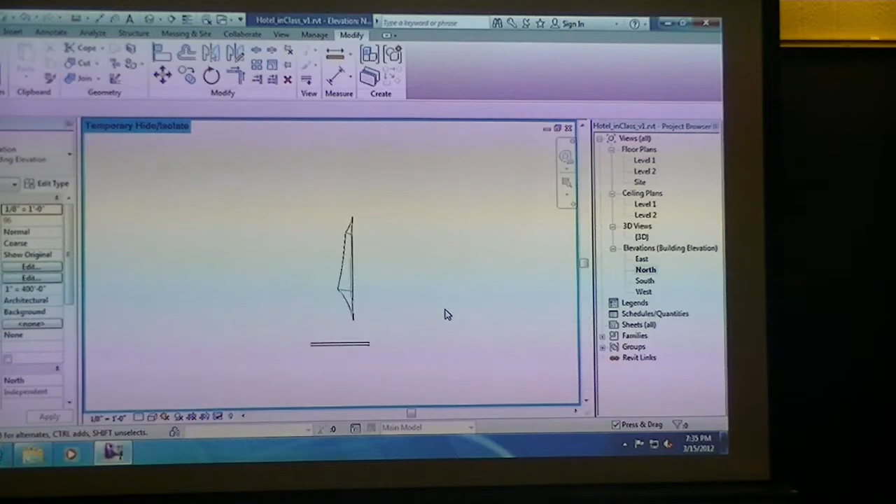The last thing I want to do before we have to go—I'm going to hide this, it doesn't matter right now. Let's go into an elevation view. So we're in the north elevation. I'm going to temporarily hide my imported geometry, and it looks like my view... maybe a south elevation is better for now.

Okay, so we have this mass. Just find a view where you can see your building in elevation a little bit. We're going to zoom in on these datum lines. What we want to do is create all of our floor lines that we eventually might work with.

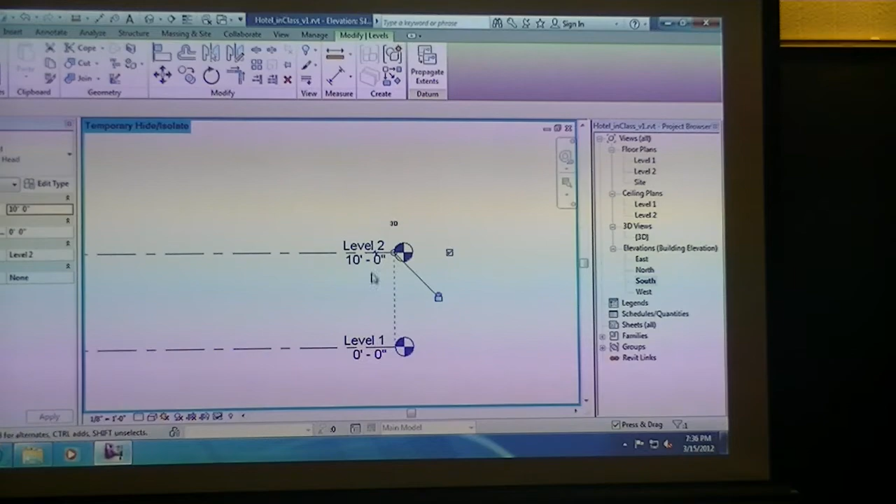The default from level 1 to level 2 is 10 feet. We all know you're never going to really have a floor-to-floor height of 10 feet—Revit does that as a default, but you probably want your floor-to-floor height to be more like at least 14 feet, maybe even 15 feet. I'm also going to make sure that my datum lines go all the way through my building. If they don't, it doesn't matter, but visually it helps for right now.

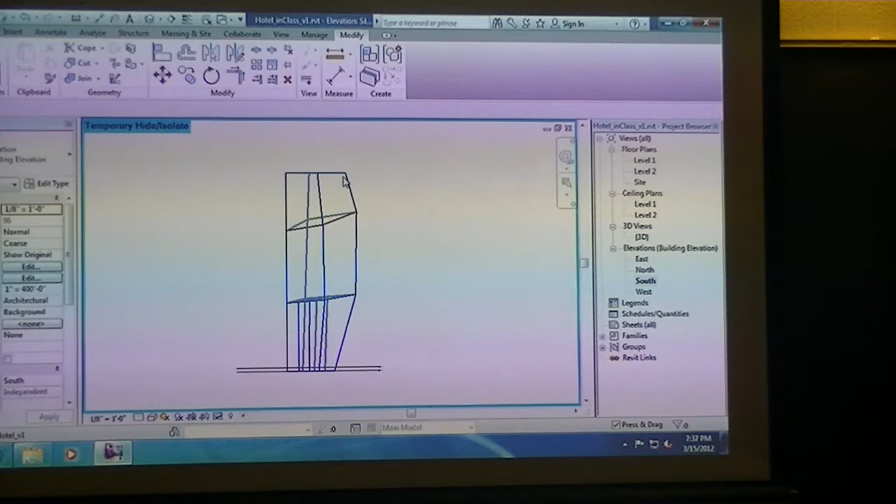Then I'm going to want to create more datum lines representing however many floors I could get out of this mass. One way to make a datum line—I'll do this real quick—is under Home, Datum, click on Level, and then we draw each one of these. As you draw a datum line, you get a checkbox that says Make Plan View. So every time we draw one of these datum lines, it's going to add a new floor to my floor plan views.

And then I'd have to change this to be 30 feet, and so on and so forth. But if you have like 100 floors, or however many floors we're going to end up doing, that's going to be a ridiculous way of working.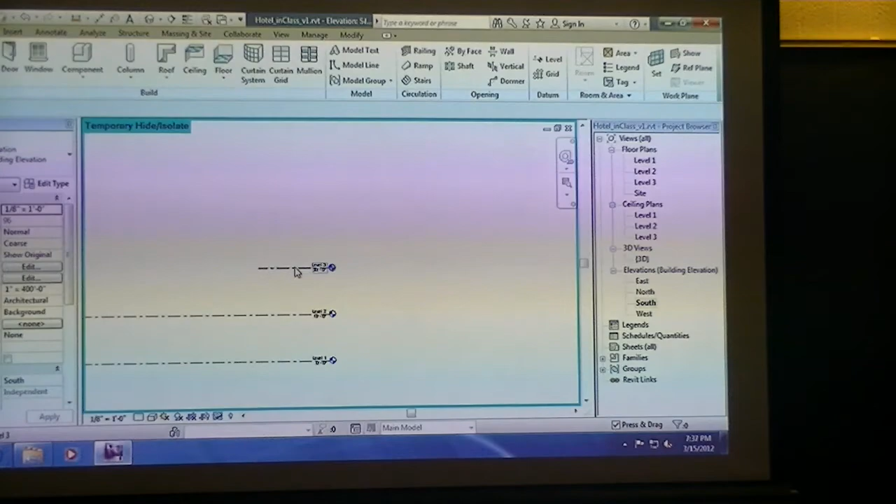So I'm actually going to delete this level 3. When I did that, I'm actually deleting a floor plan, because that datum line represents where your floor plan is located. So remember, a lot of the things we see in our Revit environment—you don't want to start deleting tags you happen to see around your drawings, because you might start deleting views. But in this case, I do want to delete that.

This time I'm going to select level 2, and then I'm going to click on, under Modify at the top here, the Array command.

You can watch the little movie that it gives you if you want. But I'm going to go ahead and click on Array, and it wants me to first click a Move to Start Point. I'm going to hover over the level 2 datum.

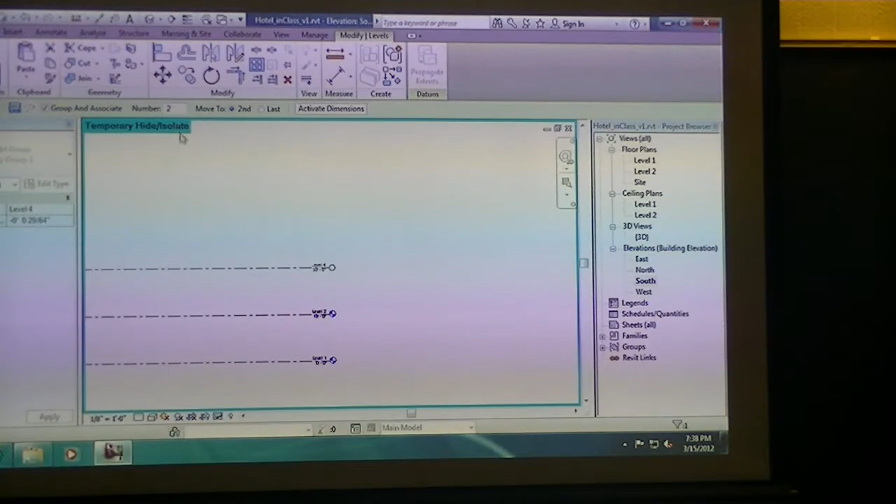I'm going to copy it up and type in 15 feet. Now when I do that, it also has a number up here that just says 2 in the options bar. When I zoom out, I also have a box here that says 2, and it's just sitting there waiting for you to input another number. If I deselect that, I can get that box to show back up by picking on that level I just created, and you get this temporary dimension again saying 2.

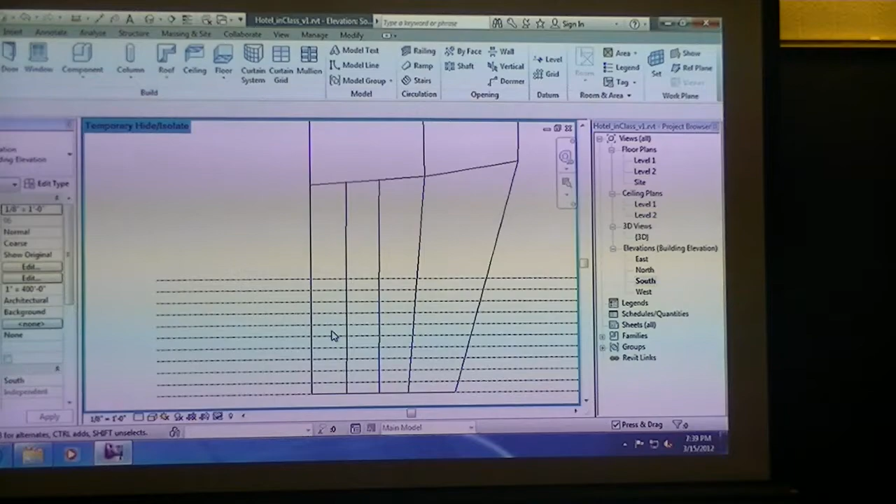If I click that and type in 10, that's actually copying those datum lines at 15-foot intervals 10 times all the way up. I start to see that still wasn't enough, so I can click on that 10, or click on one of these again, click in there, and maybe type in 30. Each time I do that, it's just adding more and more of these.

So maybe I need 60. And I can probably subtract a few, but I don't need to really worry about all of that too much. I can come back here and maybe do 55. At least for my building, I can get enough floor lines all the way up to 55.

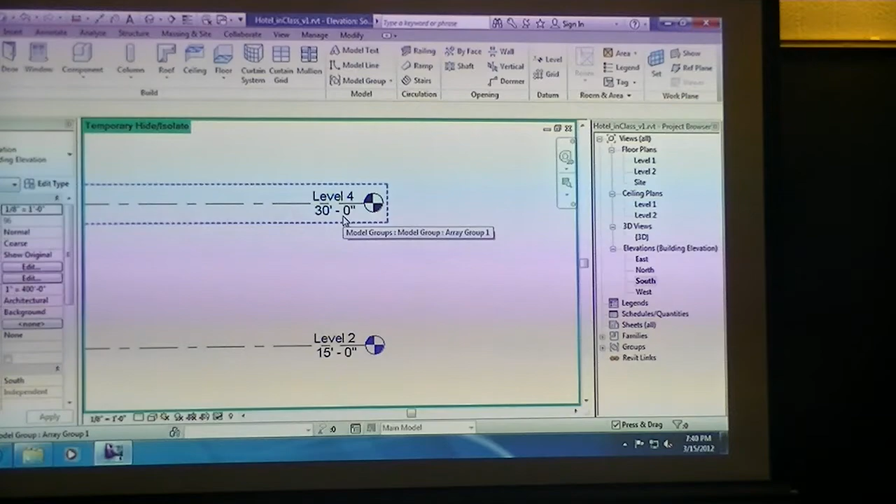But notice when I zoom in, only level 1 and level 2 are highlighted blue in the target symbol, and the rest of these are highlighted black. Now it also started to — remember I created a level 3 and then deleted it — Revit assumes you still wanted a level 3 eventually, so it just consecutively starts numbering after that.

So now I have a skip between level 2 and level 4. What I should have done is copied one more up, changed the name of that to level 3, and then gone ahead and done my array, and then I would be all in order. But I'm not going to worry about that at the moment.

Also notice what you can do is click on these blue lines, or the blue targets. If I double click on it, it takes me into the project browser and takes me to level 2. If I click this little X button at the top right of this view to close out, and do the same for level 1, you can see it takes me to level 1. So remember, anything in blue that's a tag in Revit is associated with anything in the project browser.

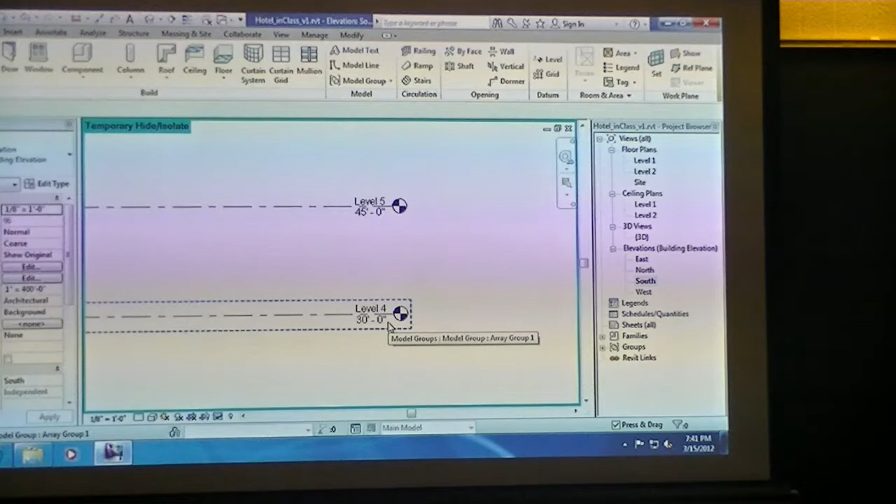But notice when I did all the copying in the arrays, all of my other levels did not show up in my project browser, and they're black. Revit sometimes assumes you don't want to make a floor plan cut at every little datum you copy, because sometimes you want a top of steel height, a parapet height, a roof height, or some other obscure height you eventually want to reference, but you don't need a floor plan cut of it. In this case, though, we do want all of these to be floor plans.

So what we can do is go to View, and under Plan Views... this screen resolution must have changed a little, so I've got a different icon setup maybe from what you have on your screen. That happens with Revit a lot — depending on your screen resolution, your icons start changing around. So I might have to bump this up to whatever it used to be. Anyway, that's why I'm noticing I got a different screen than everybody.

But anyway, under View and Plan Views, you can click Floor Plan. When you click that, a dialog box comes up asking if you want to create a new plan. We have located that there are a bunch of datums called level 4 through 57, so we can select all of those — just level 4, then hold Shift and pick the last one — and go ahead and hit OK.

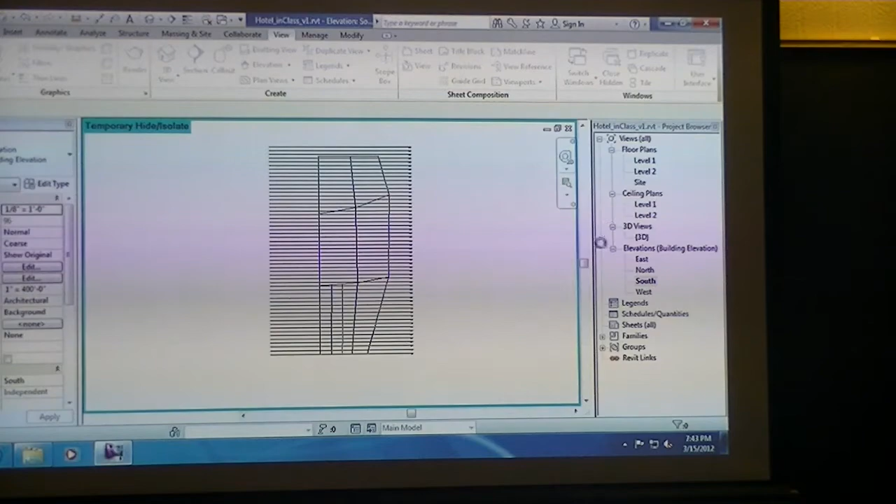This might take a minute, but your project browser should populate. It's blinking around because it's actually opening all of these views in the background as well. And you can see my project browser now just grew — levels 1 through 57.

Remember at the very beginning of this class when I said we need to separate our project browser and properties? This is why - eventually you get a lot of different views in your project browser that you have to scroll back and forth trying to find, and having that little screen on the left really gets annoying.

Two last things so we can close out tonight. Under 3D view, go ahead and click your mass that you created. Now that we click that mass, because it's solid geometry, you should have a little icon called Mass Floors. Click on that and you'll get a dialog box asking which of these levels that have been created as floor plans you want to be a mass floor.

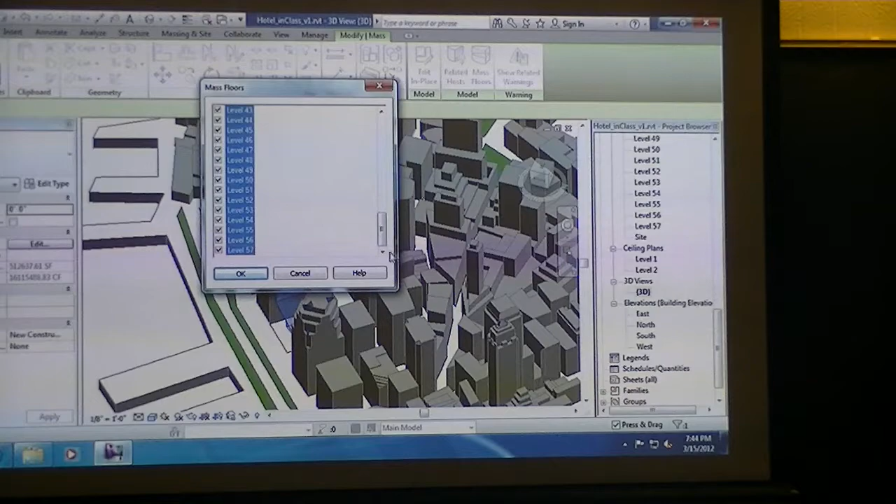I think I can select all of these and hit the checkbox. I'm going to select all of those and hit OK. It'll take a minute.

My floors aren't showing up. Mass floors - I checked them all, I hit OK. That's what I did, it didn't work. So I just checked it again - it takes all like 10 seconds.

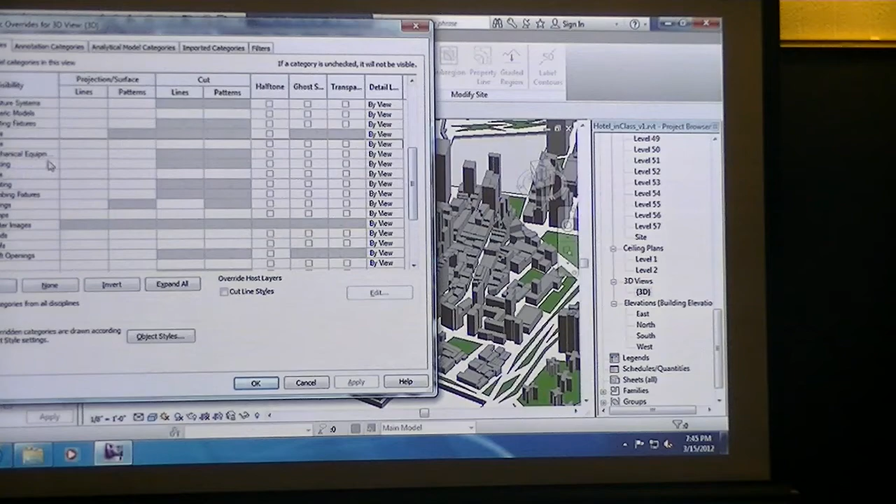Till tomorrow - yeah, mine didn't work either. I like to risk it. You're not risky, it's not fun. I'm risky - for some Wisconsin reason, going to the Final Four. Hold on a second, see? Maybe I don't. Maybe I haven't gone to the Elite Eight. What is it? Maybe it's all different passes. I think I have. That's what I'm wondering, but it's a good squad. They're good when they want to be good.

Did everyone get their mass floors to show up except for me? Mine didn't work, I checked them. Yours worked? It did not work, I didn't check them all. So I just checked them even though I haven't even gone to the Final Four.

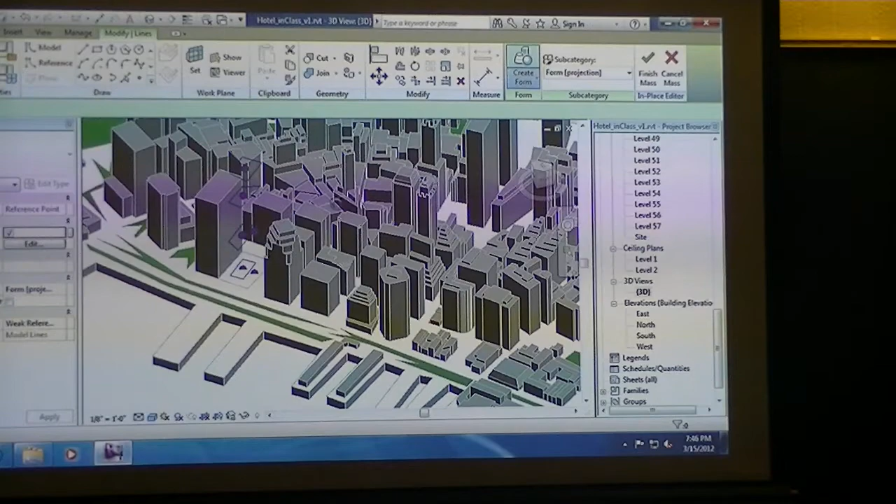I think that might have had something to do with a warning message I had earlier - it said something that it's not going to be able to compute something, and I ignored it. That was probably the computation it can't compute. Is it because I stacked my different masses? Is there a way to fuse the masses together into one? Yeah, you can actually join the masses.

This time I still had all those floors checked, and I switched my mass around. I corrected it, and you can see that I now have all of my mass floors. One thing I want to do is click on this mass.

Hit edit in place, and I'm going to add a material to this overall mass. Come on, guy, edit in place. We're going to go over just a little bit here - I know you guys want to watch March Madness, they just start till 9.

We're okay. So I'm going to go to material and assign a material to this mass. The computer is slow. I'll pick - I'll just do a default, and I'm going to duplicate it, just call it default 2 for now. And under graphics, I'm going to turn up the transparency to something like 50. Finish.

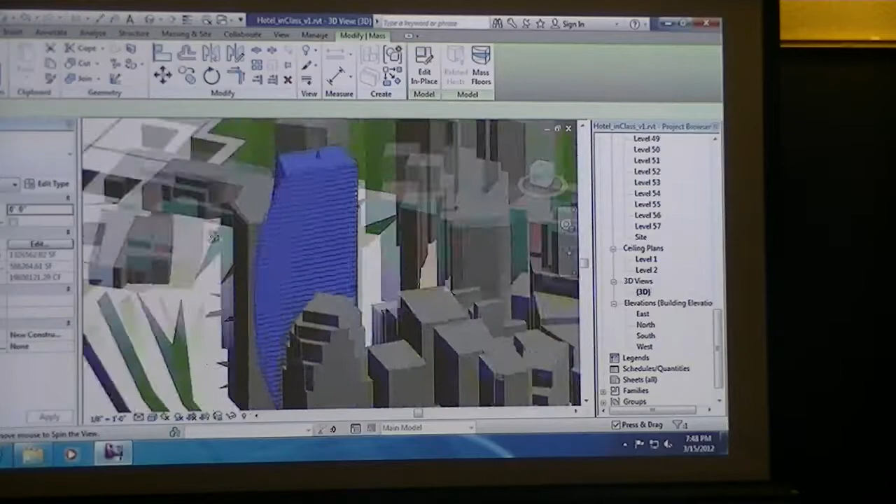Now what we're going to do is click on View and create a schedule. So everyone at this point, you got your mass floors working. Click on Schedule, click on Schedule and Quantities, and we're going to scroll down.

Anything in Revit we can actually schedule - that's what's great about Revit. We can schedule doors and however many curtain wall panels we might have had in our model. But we can scroll down to Mass and click on Mass Floor. This will make a mass floor schedule that we can hit OK on, and it will bring up schedule properties showing some parameters you can schedule that are built into Revit.

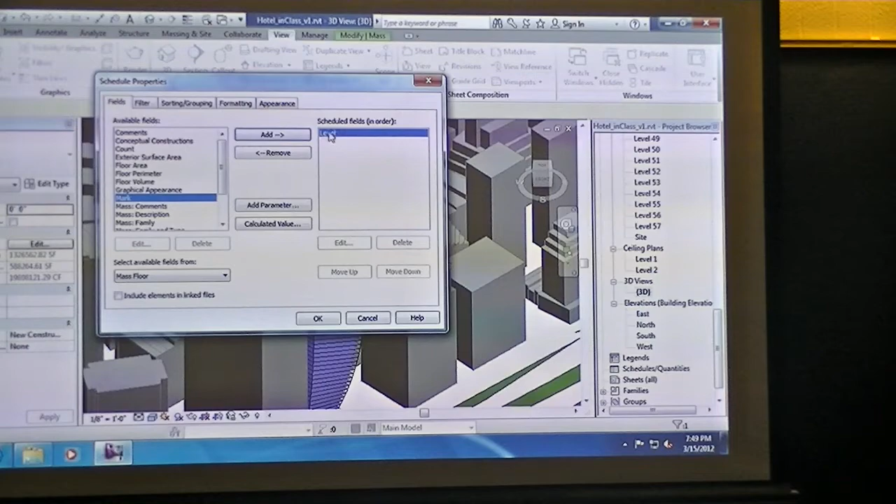One thing I'm going to do is click on level, and I'm going to add this to the right side of my schedule. This is like in Excel, you're creating a heading and adding it as a heading into your schedule. The next thing I'm going to do is click on floor area and add that to the schedule as well, and hit OK.

You now should see level 1 through however many levels you had scheduled, showing a floor area for each of the floors. But I also want to know what this total area is, and I'm going to go under to the left here—we'll go over this again at the beginning of next class—but you see these edit buttons? Just go ahead and pick one of them.

And I want to get a grand total under sorting and grouping. I'm going to click on grand totals. And then under formatting, under floor area, I'm going to check the box called calculate totals. I'm going kind of fast here, but you guys we'll review this again.

And we can see now that this is the area shown for my tower, which looks a lot bigger than my program area. But that's the total area for my tower. Now what's important about that...

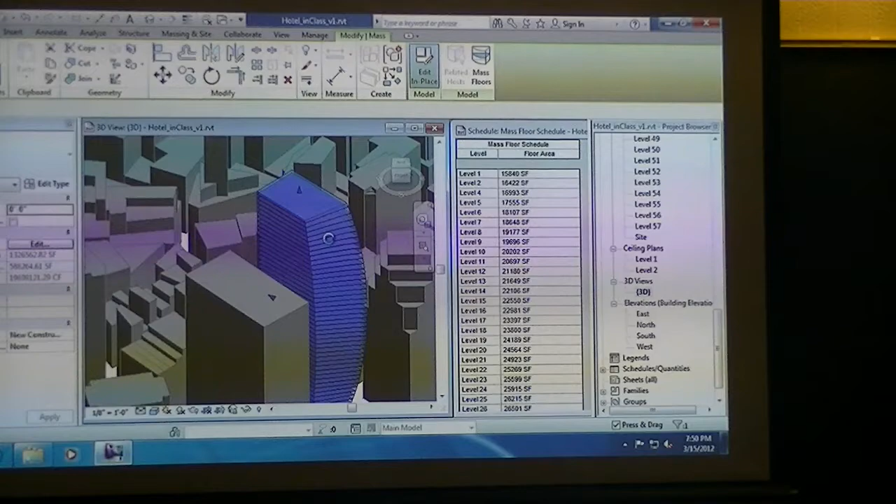...is if I go ahead and set up this schedule and I set up my flat mass floor areas, if I were to click on this mass, edit it in place, and make some adjustments to it now—I'm just going to move this around a little bit—you should see that this schedule is going to adapt and change to reflect the new changes that I've just created.

So I've got X-ray view on. Is everyone's computer going slow now?

It shouldn't really slow down that much. But I'm going to go ahead and move this in, and I'll go ahead and finish this mass, and then we'll end here.

So right now what it's going to do is as I finish this mass, it's going to readjust all of those mass floors to fit exactly in the shape of my model.

And when I look at this schedule and scroll down, you can see my total has changed. So this is why in Revit, if you can start doing some conceptual massing—you can do conceptual massing in other programs—but we now have a direct link to a schedule that we can actually start to define to see if our building's too big or too small for the program that we're trying to model to.